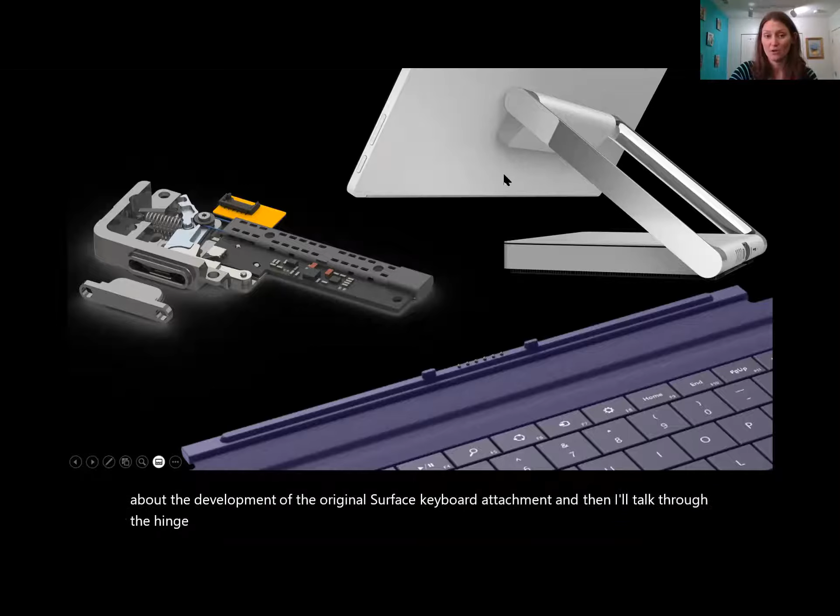And so now I can dive into some of the design examples that I'm sure plenty of you are hungry for. I am going to tell you some stories from 3 different products I helped create. First, I'll talk about the development of the original Surface keyboard attachment, then I'll talk through the hinge design on the Surface Studio, and I'll end with what we call the Detach Module on the first Surface Book.

In my engineering classes throughout college, I was given a ton of problems to solve. Usually these problems had a general definition, a lot of constraints, and an unanswered value that I was seeking. My goal was to find that answer and show the work that got me there. I assumed product making would be similar. You want to make a computer. It should weigh this much. It should be this thick. It should have this much battery life. Now I'll go design the answer. But I quickly learned that was not even close to the case when you're trying to design something that's new and innovative and not out there.

There's no recipe. There's barely even set constraints most of the time. And there definitely isn't a correct answer that you're seeking, and not just one path to get to the end. One of my favorite quotes that I relate closely to product making is this: "If I had asked people what they wanted, they would have said faster horses," attributed to Henry Ford.

So before you jump to conclusions on the quote, I don't see this as consumers are dumb. I don't even see it that consumers don't have great ideas, because they do. But for me, it's more about not closing yourself off to just improving what already exists. It's more about opening yourself up to any and all possibilities and seeing where they take you.

Since the beginning of Surface, we've always started each project with one thing that is going to make that product special and different from anything else in the market. Usually, that one thing has a word that we think of as a main principle or guiding light for that product. For the Surface RT and Surface Pro 1 keyboard, that word was magic.

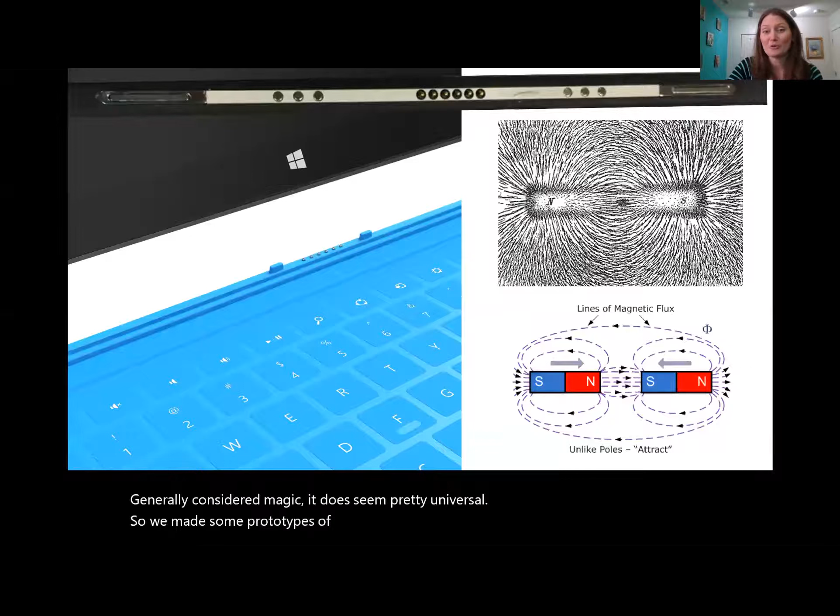So we made some prototypes of magnets. We learned about the general principles of magnets. We bought some off-the-shelf magnets online. This image at the top of the screen is the very first prototype we ever made, where we put some rectangular bar magnets and some circular dot magnets into both the keyboard and the device. And we tried it out, let's get started and see what happens.

Now, we used single pole magnets, which means, as you see here, each magnet has a north and a south. And you can see that the flux is essentially wasted in our application because it's such a large area as it travels from north to south. And we just want it to be in the area that attaches these two devices. So it gets a little bit out of hand. So we needed to research, how were we going to be more intentional about this?

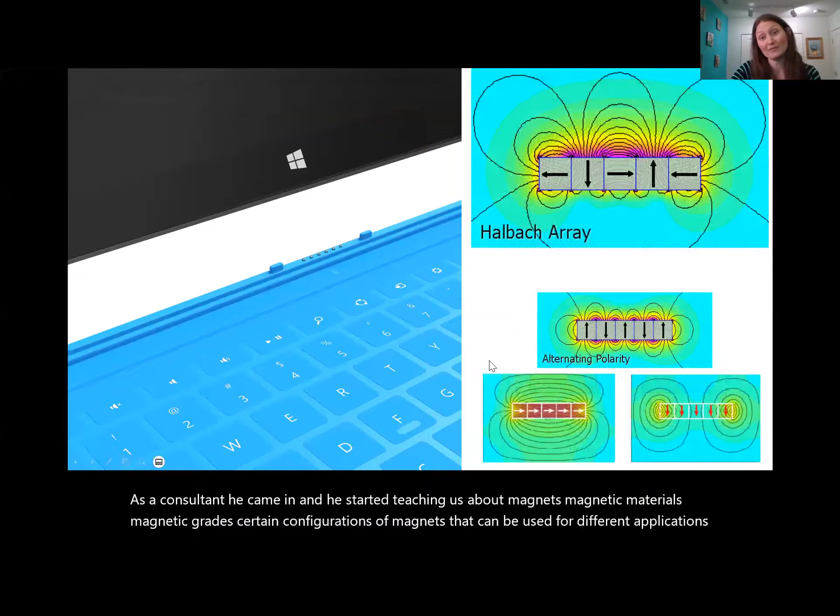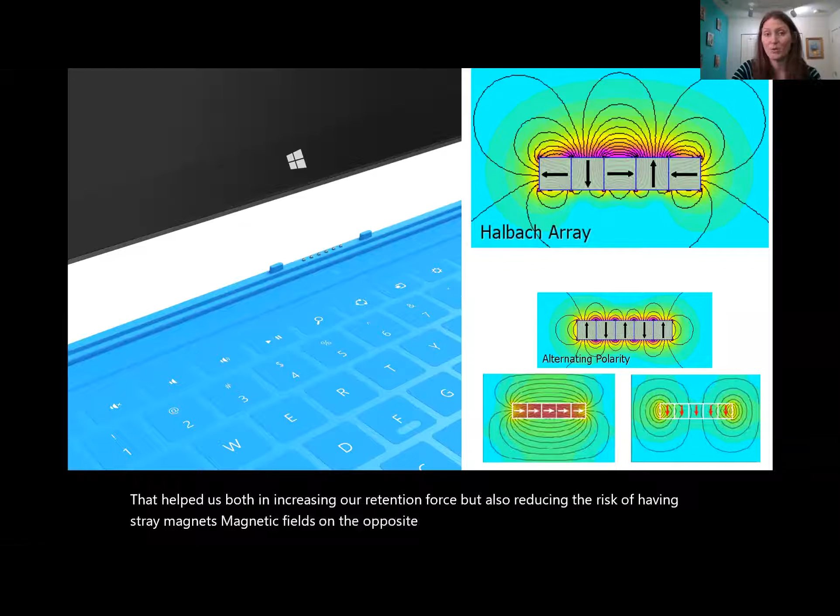So as you see, the fields don't actually have to travel as far to get from the north of one pole to the south of the next pole. And that essentially allows them to double the flux on one side of the magnet while reducing the field to almost nothing on the opposite side. That helped us both in increasing our retention force, but also reducing the risk of having stray magnetic fields on the opposite side of the keyboard, where it could attach to jewelry or metal fibers, or even worse, erase your hotel key or credit card magnetic strips.

The other added benefit to this array is that we could put this series in both the device and the keyboard, and it made clamping great, but it also really helped with alignment. Because similar poles repel each other, this array wants to line up perfectly with its opposite match. So it was really good for our alignment.

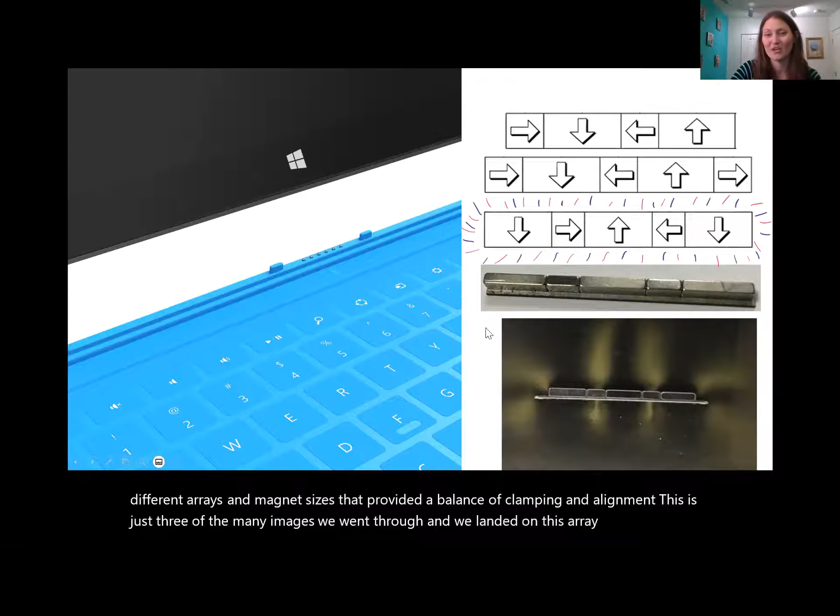We did a combination of magnet simulations mixed with prototypes to iterate through different arrays and magnet sizes that provided a balance of clamping and alignment. This is just 3 of the many images we went through. And we landed on this array here, we called it the 3C2A array, standing for 3 clamping, 2 alignment. These vertical ones served the purpose of clamping, and the horizontal ones served the purpose of alignment.

We might have thought at that point that we were done, since we had gotten really good retention. It's so much better than how it started. We got really good alignment. The pogo pins that you see here were always consistently aligning every time we were attaching this device.

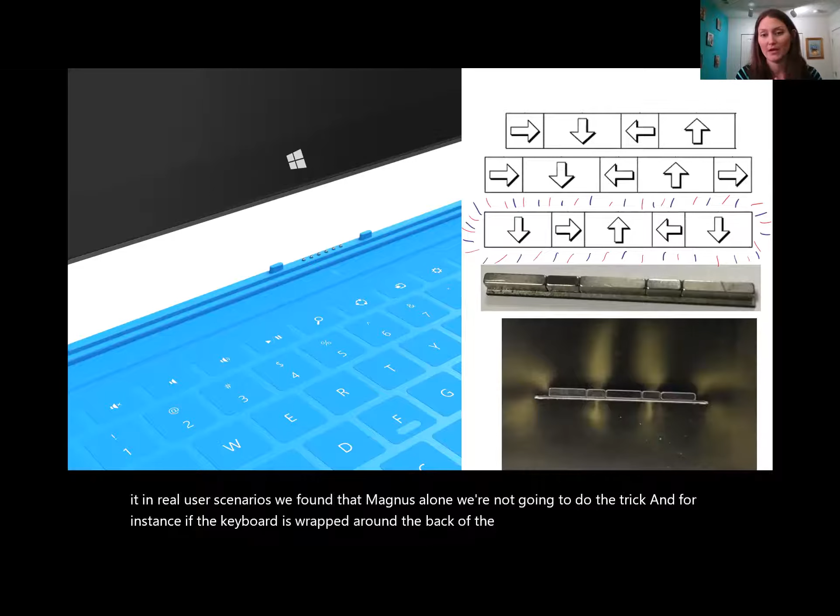But when we started really experiencing this prototype with the device and we started putting it in real user scenarios, we found that magnets alone were not going to do the trick. For instance, if the keyboard is wrapped around the back of the device, the leverage was too much to overcome. The magnets would give and the keyboard would just fall off the device.

So we had a lot of brainstorming sessions with a lot of engineers across the whole group, and made a whole lot more prototypes that didn't fix it. And we finally came up with the idea of fangs to serve as mechanical retention during the rotation. These features, circled on the left, mechanically bind and keep the keyboard spine from wanting to rotate, forcing only the fabric to fold backwards.

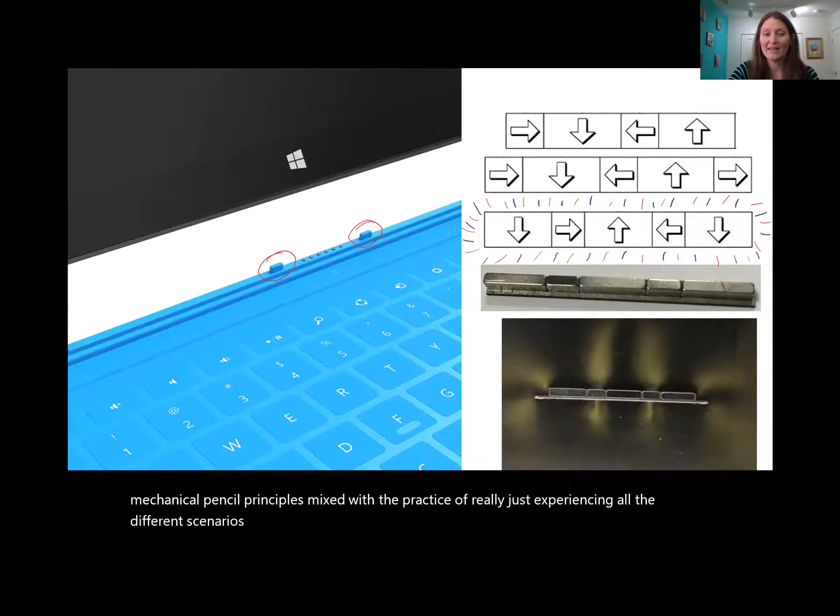So the combination of these mechanical principles mixed with the practice of really just experiencing all the different scenarios for ourselves enabled a design and a product that we really believed was magic, but also functional. It's also worth mentioning that we got 11 different patents on just this portion of the device alone, and how we were able to create this experience in a unique way. So that was pretty cool.

Okay, moving on to a very different aspect of mechanical engineering. I want to tell you about the Surface Studio hinge. For those of you not familiar with the product, it's considered an all-in-one that contains the computing device in this lower region and a 28-inch touch and pen display in the upper section. Let me play that. Good, played.

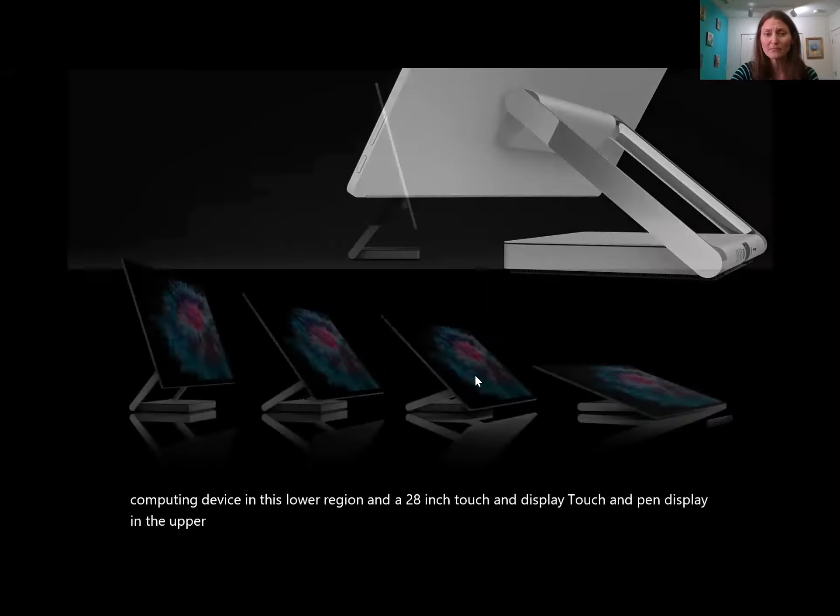The hinge is designed so that the user can use it as their monitor when it's up in its vertical position. They can also transition it down to a drafting table if they want to use it for sketching, and then put it right back up again to be a monitor to be productive again. The hinge was our one thing for this product that had to set it apart from anything else in the market. To do this, we used our one word, and in this case, it was effortless.

I remember the design director suggesting that this needed to be such an easy, effortless transition that his 5-year-old could come and lift this heavy monitor without a problem. He even threatened to bring her in the office a few times when our prototypes weren't quite good enough.

Now, this design direction seemed really ambiguous. So we couldn't start with torque curves and force settings like you might in a typical problem. We had to go back to the basics. We had to start to work through the math and free body diagrams of what might happen in different user scenarios. I probably made some mistakes in this, so don't judge it too much.

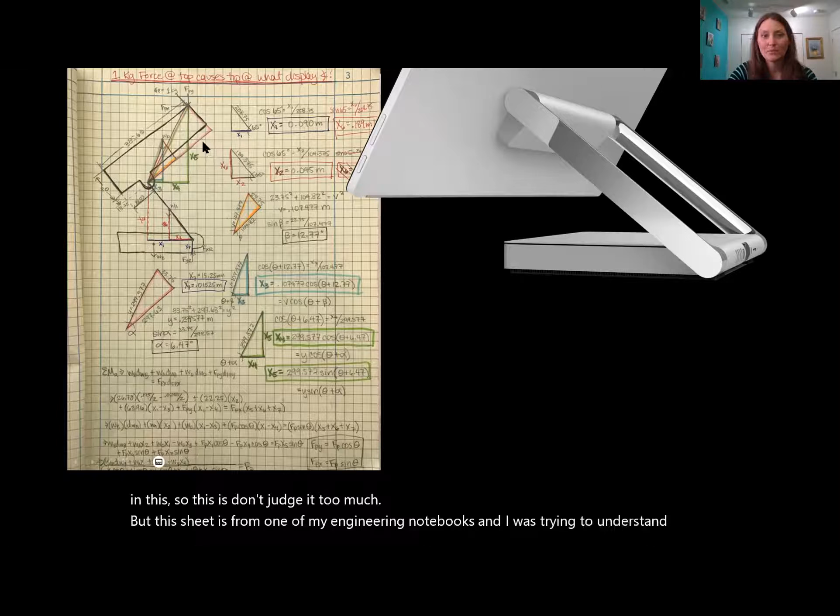But this sheet is from one of my engineering notebooks, and I was trying to understand what display angle would cause the device to tip over if a user applied 1 kilogram of force at the top, mimicking them closing a window or maybe even sketching at the top of the device.

Now, just to get that 1 kilogram force number to start these equations, we had to design some faked prototypes and put them through user testing with pressure sensors and force gauges attached to them, so that we could understand what a user might actually do. We had to find ways to live these experiences just to bring constraints to the mechanical engineering problem and be able to do the math to figure out what we needed to do.

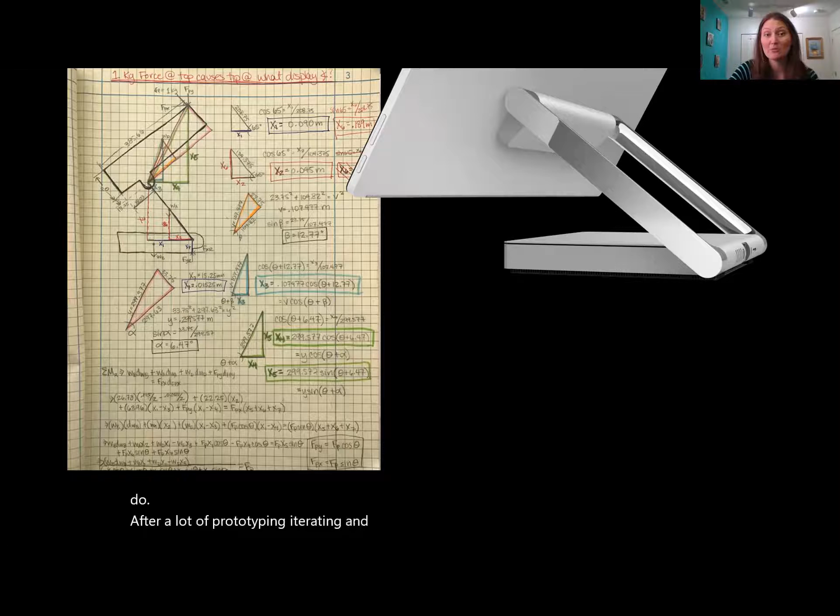After a lot of prototyping, iterating, and even switching product teams midway through, the design finally came to an end. So I'll give you a little insight into where we landed, and a quick little walkthrough of the mechanism. So this here on the left is the display joint.

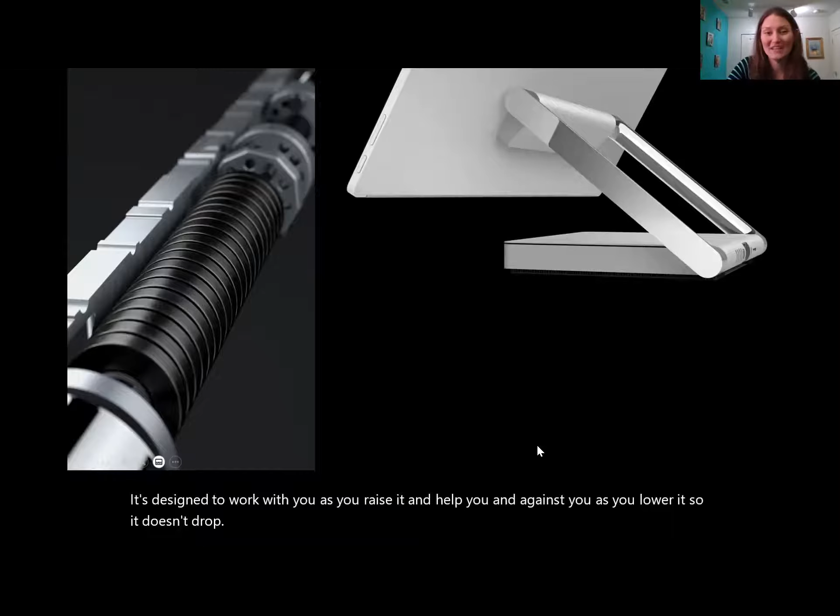This is our beautiful marketing rendering, so it doesn't have all the mechanical drawings that you might expect, but what you're seeing right now is a pretty intense one-directional counterbalance torsion spring designed to counteract the weight of the heavy display. It's designed to work with you as you raise it, and against you as you lower it so it doesn't drop. These shiny arms, in addition to routing the cable and looking beautiful, house a 4-bar linkage design made from belts, gears, and other mechanical couplings.

And it defines the relationship between the arm angle and the display angle without allowing free play or bounce. That limits the device to 1 degree of freedom, but it still enables optimized angles in desktop mode, studio mode, and everything in between. The base hinge is a compression spring-loaded cam mechanism that works with the display springs and linkage system to keep the system balanced and smooth throughout its full range of motion.

After assembly in the factory, these design features are tuned with 11 unique processes that each and every system must go through before it gets boxed up to ensure that it has the perfect transition. This extreme tuning is not typical of other Surface devices we ship, but the problem was unique and difficult enough that we had to put the right processes in place to get that premium experience we wanted every customer to have.

Although we were not able to start the product with a known user torque profile, one important aspect of product making is documenting the process at the end. This is partially for future development, for when we make the next one, but it's also to ensure that we have consistency in the product over time.

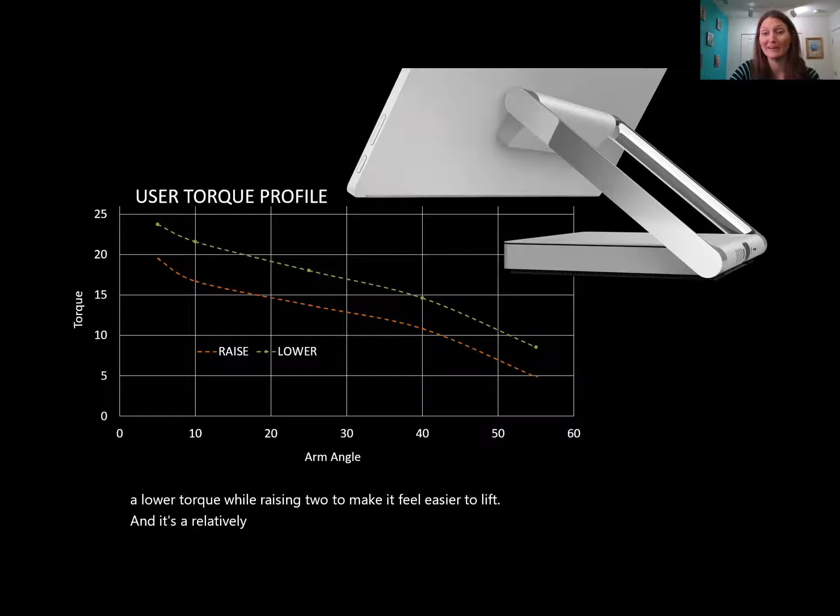As you can see, the final design resulted in an asymmetrical torque curve that had higher torque while lowering to make sure it wouldn't fall down, and a lower torque while raising to make it feel easier to lift. And that's a relatively common method for fighting gravity, but probably why marketing named this the zero gravity hinge, and ultimately got us a device that the team was proud to say could actually be transitioned by a 5-year-old.

The last example I'd like to walk you through is unique compared to the other two, in that it was not just mechanical engineering that had to discover and design around an experience. This is what we call the Detach Module for the Surface Book. The Surface Book is one of the higher end mobile devices that Surface makes, and it has a challenge of integrating both a CPU for compute processing and an NVIDIA GPU for graphics processing.

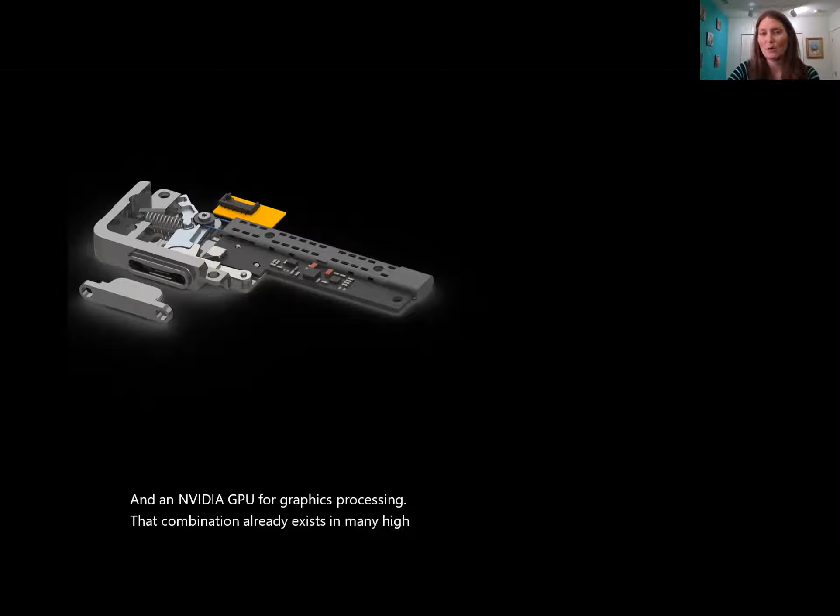That combination already exists in many high-end PCs on the market, but we needed one thing that was going to make ours unique. Because Surface has always been pen and touch centric, we decided we wanted this device to be something that artists and creators could use in their everyday work, but also enable mobility. Imagine a photographer who travels to LA for a photo shoot, needs to be able to real-time process their images on site, sketch on the screen while discussing with the client, and then go back to their hotel to edit all the photos and send them out that night. This customer was an inspiration for an experience we wanted to enable.

So we made a device that could separate from its base when you needed inking and mobility and reattach when you needed performance. Here's a video showing that removal experience, what we refer to as detach. The top tablet portion has a CPU, batteries, all the typical guts of a touch and pen enabled tablet, so it can be fully used on its own. Then when you attach it to the base, you add even more battery life and the power to run 3D CAD design, photo and video editing, or even start gaming.

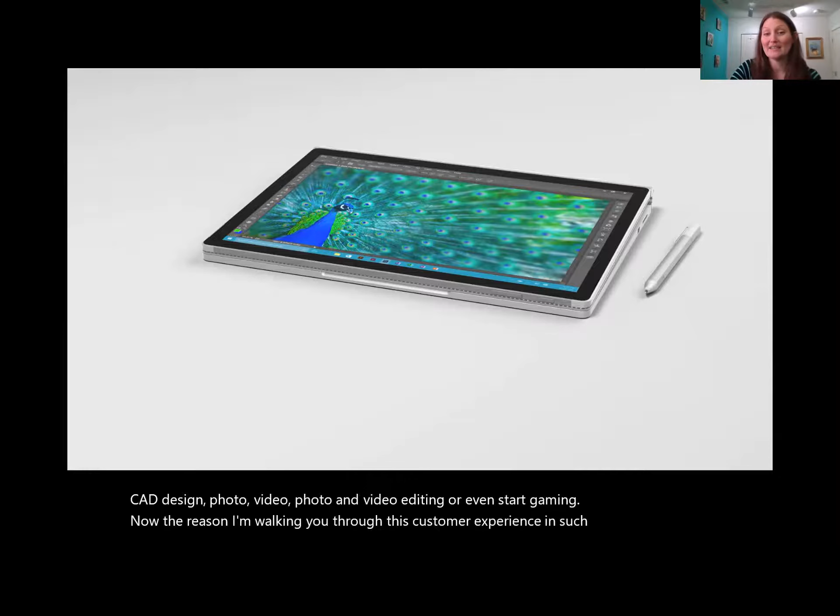Now, the reason I'm walking you through this customer experience in such detail is not purely for Microsoft marketing. I really think it helps draw the picture around the one word that helped us define how we wanted this design to work: seamless. The device needed to be able to transform in a seamless way, enabling max productivity. You want to watch a movie, sketch a quick design, or show some images to a client, take the tablet off. You need to get back to being productive, attach it to the base.

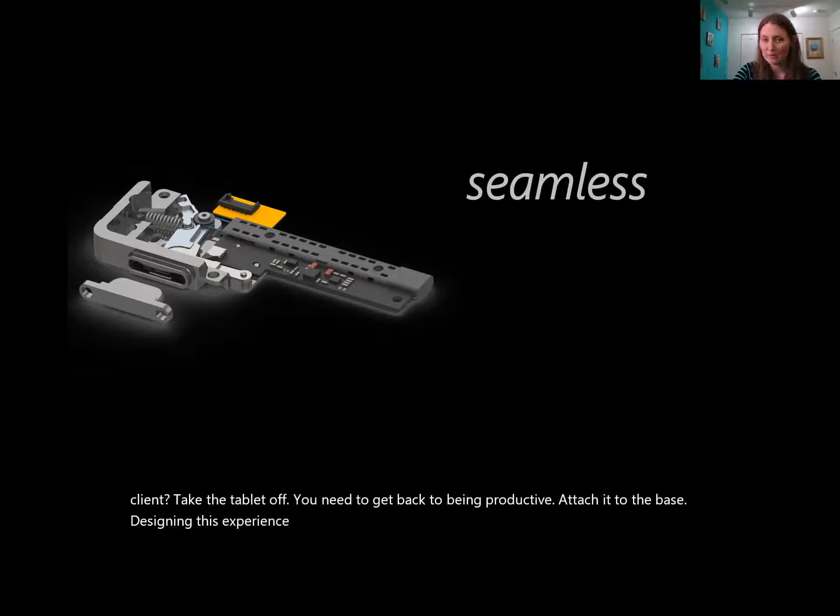Designing this experience seems like a mechanical problem at first, until we realized that separating your GPU from your CPU while the GPU was being used could cause weird failures, including data loss. Not something we were willing to risk. So we quickly agreed that this needed to be an active latch or lock that asked the computer permission before releasing. Basically, we needed an actuator. And so our research began.

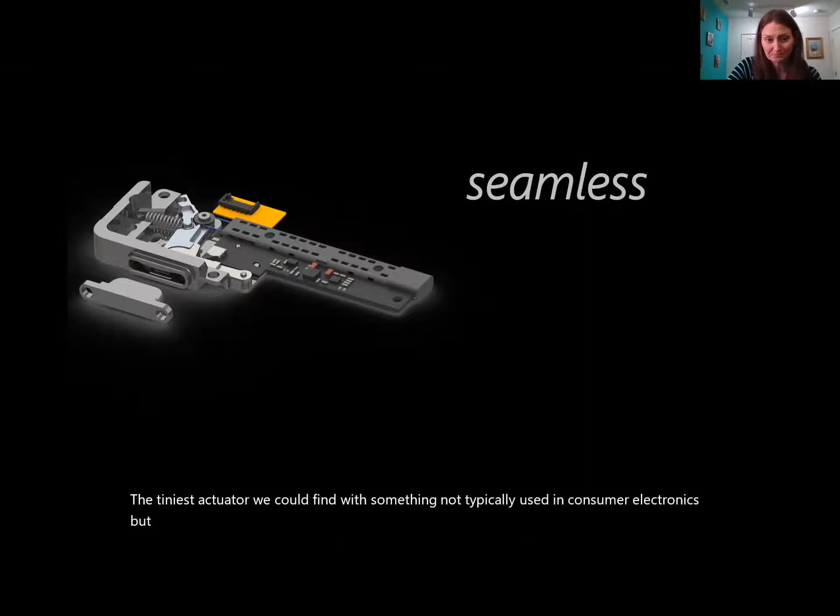Motors are the most typical actuators used in electronic devices, but we had to fit this in a really thin tablet. The tiniest actuator we could find was something not typically used in consumer electronics, but it seemed possible. We made a prototype using a shape memory alloy called nitinol, named for its ingredients nickel and titanium, and it worked great. We could apply a known current to it and tightly control its contraction, stop the current, and it would slowly expand back to its original shape.

With the right mechanism behind it, we would be able to use this actively to release a lock and enable the top to separate from the base.

Now I'll keep this video playing on loop since there's a lot to see. I think it should just keep playing. If it doesn't, I'll replay. I'll talk through how it works as you're watching it.

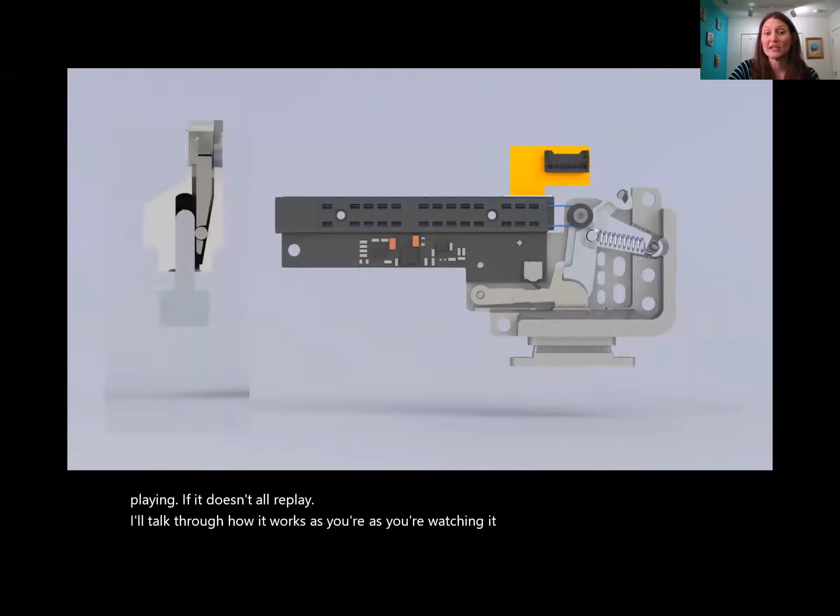So the picture on the right is looking at the mechanism that is housed inside the computer, except for this fang. This is part of the base that comes in and out of it. But the rest of this is housed inside the actual tablet part of the computer. The image on the left is a cross section, imagine right up through the middle essentially, so you can see how it's working, what's going on the inside of the module.

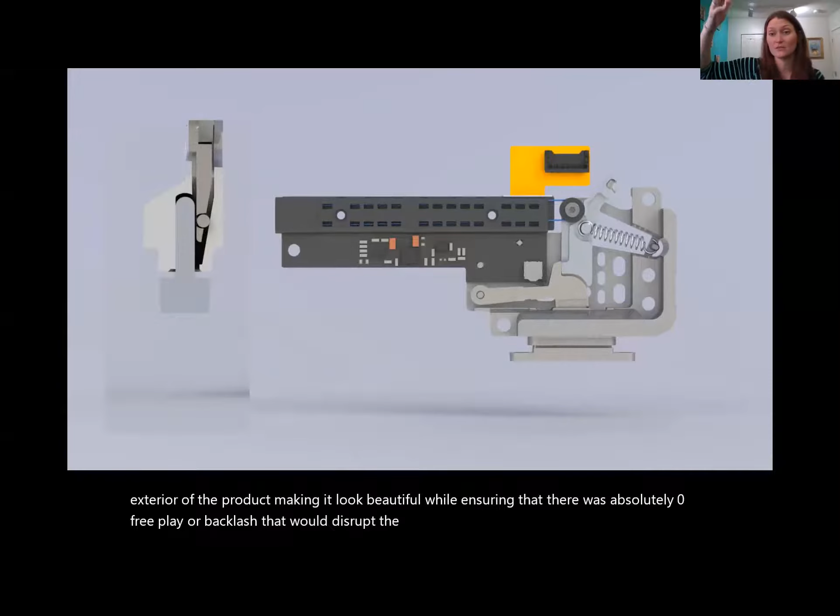Our main constraints here involved doing our best to minimize the visual disruption to the exterior of the product, making it look beautiful, while ensuring that there was absolutely zero free play or backlash that would disrupt the connector that carried all the signals between the CPU and the GPU, the top and the bottom. We needed something that could be attached easily anytime by the customer, but needed to ask permission from the computer to release. These constraints forced us to do a ton of exploring and bridging from experiences in our life as a customer, and then bring them into design possibilities and try them out.

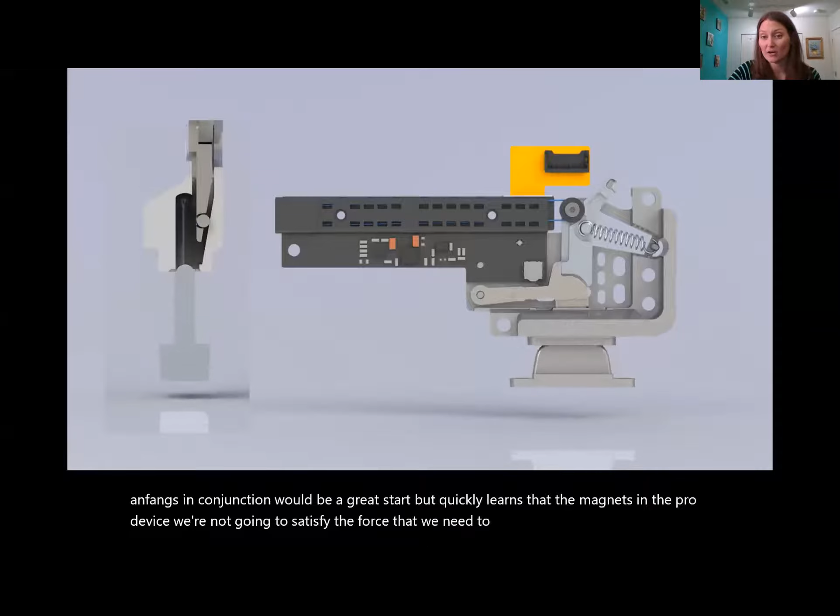Part of our inspiration, as you can tell by the fang, came from the first thing I talked about today, the Surface Pro device and keyboard connection. We thought that magnets and fangs in conjunction would be a great start, but quickly learned that the magnets in the Pro device were not going to satisfy the force that we need to lock it in place, since this is much heavier, or the alignment tolerances that we need. The pogo pins that we had in that had a lot more free play and freedom. The 80 pin connector that we used to have the CPU and GPU talk to each other needed extreme precision. So we basically needed to rely a lot more on the fangs in this product than we did the magnets, which is opposite of how we did on the Pro.

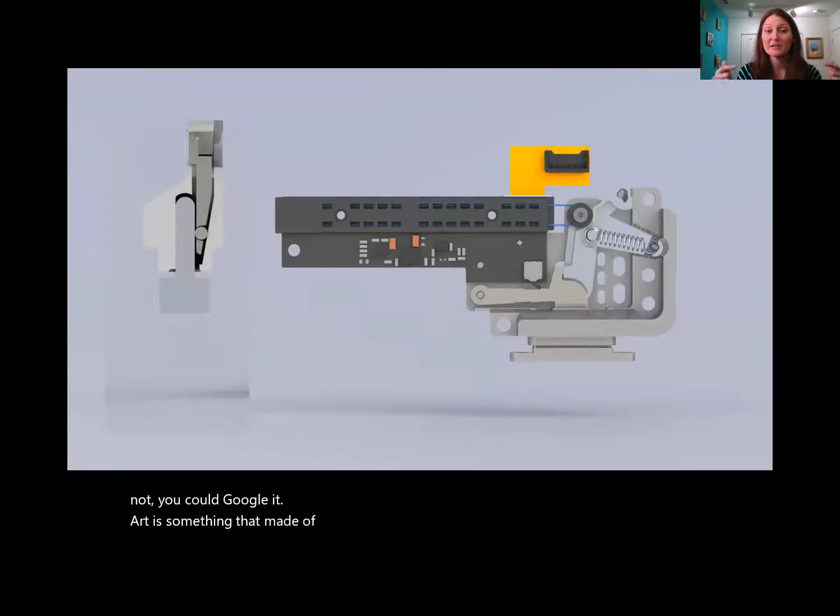So enter, after that, our second design inspiration, the Chinese finger trap. I hope many of you are familiar with that. If not, you could Google it. It's something typically made of bamboo. You can easily place your fingers inside anytime you like, but when you try to remove them, you're essentially creating a friction lock with your fingers. The harder you pull, the tighter it gets.

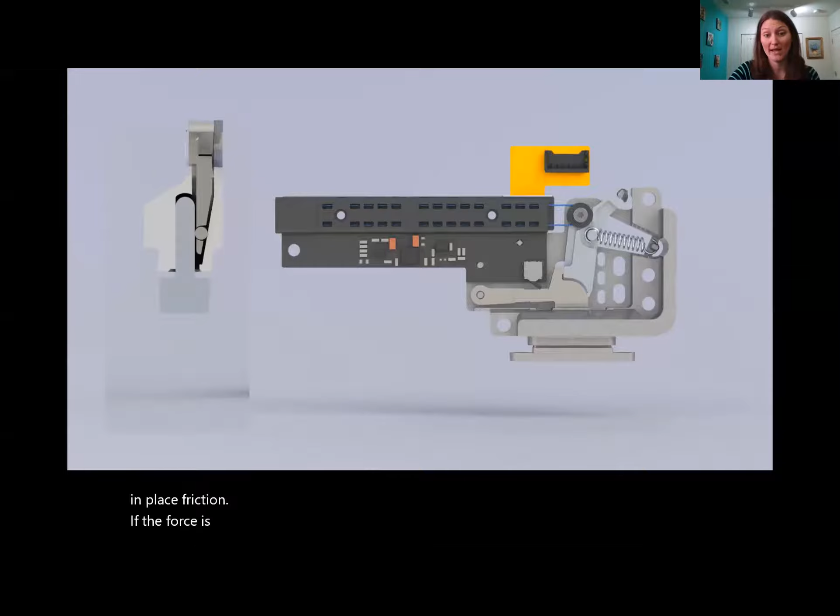In the design here, you see, we have a roller that is trapped between two surfaces, but it's able to roll freely if pushed or pulled. Now, as the fang gets inserted into the detach mechanism, it pushes the roller up and locks it in place with friction. If force is applied in an attempt to pull the fang away from the base, it gets tighter and locks into place, essentially making it stuck.

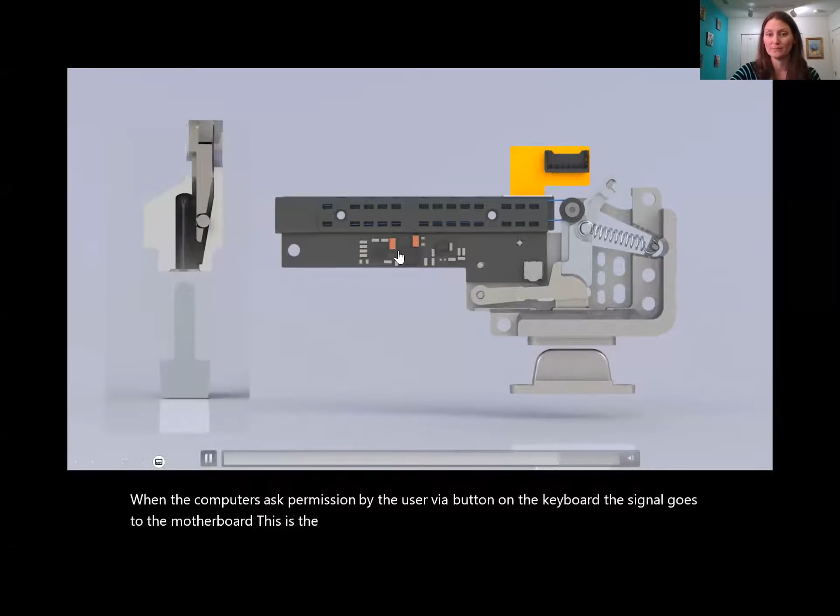The only way it can be released is for the roller to be pulled up vertically and out of the way. This is where the nitinol, also known as muscle wire, comes into play. And that's the blue wire that you see up here. The muscle wire is attached to a lever arm that can pull the roller up and out of its locked position. When the computer's asked permission by the user via a button on the keyboard, the signal goes to the motherboard. This is the Detach Module board, but the signal would go through this FPC to the motherboard. Send it a signal, ask it permission, and if it said yes, go ahead, you're not using your GPU, it sends the current here, contracts the muscle wire, pulls the lever out of the way, unlocks it.

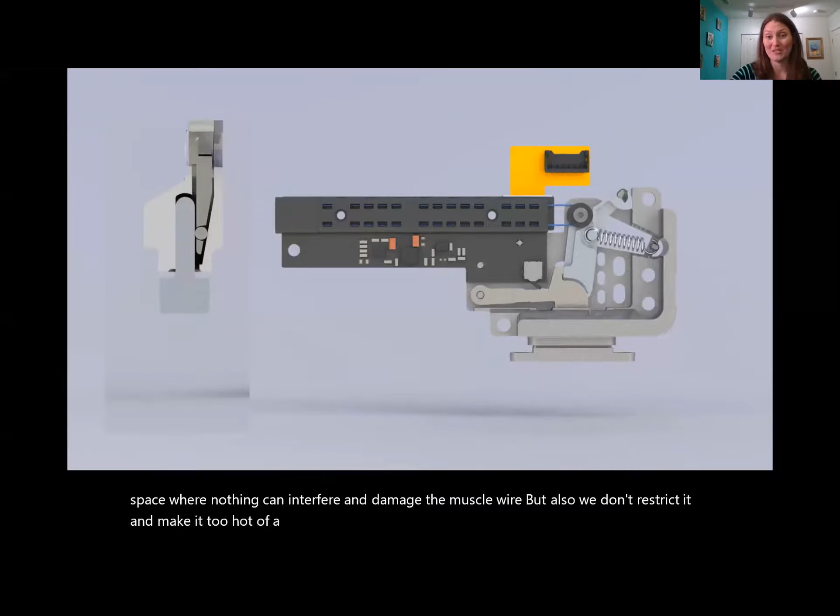Now there was a whole lot of time spent on how much current, how long do we send the current, how long does it take to cool down? How can we try to enable a space where nothing can interfere and damage the muscle wire, but also we don't restrict it and make it too hot of a little thermal area where it can retain heat? So there's definitely a lot of work beyond the mechanism you see here to make this work, but it was still a pretty intense and pretty fun problem to work through with the EE team designing these boards and the software team designing how that interaction is going to happen from customer to the actual mechanism.

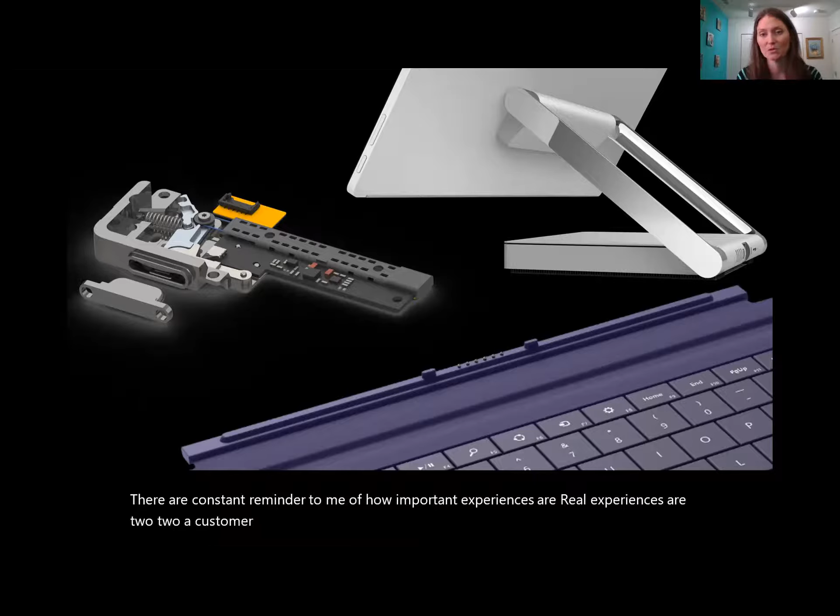Now, all of these designs took an incredible amount of concept work, prototyping, iterating, testing, troubleshooting, you name it. They're a constant reminder to me of how important experiences are, real experiences are to a customer, especially nowadays when we're so closely tied to our devices. I feel proud to have a job where I can bring new ideas into the world and get to be both the designer of it and a consumer of my own work. And I think it really helps me feel connected to what I do.

And it makes me appreciate the challenges I see everywhere in all different kinds of designs. It's opened my eyes to seeing a whole lot of stuff in the world, which I had never really noticed before. Now, when I'm asked advice from engineers interested in getting into this field, I encourage them to do one thing, and that is design. Find problems in your life and design a fix for it.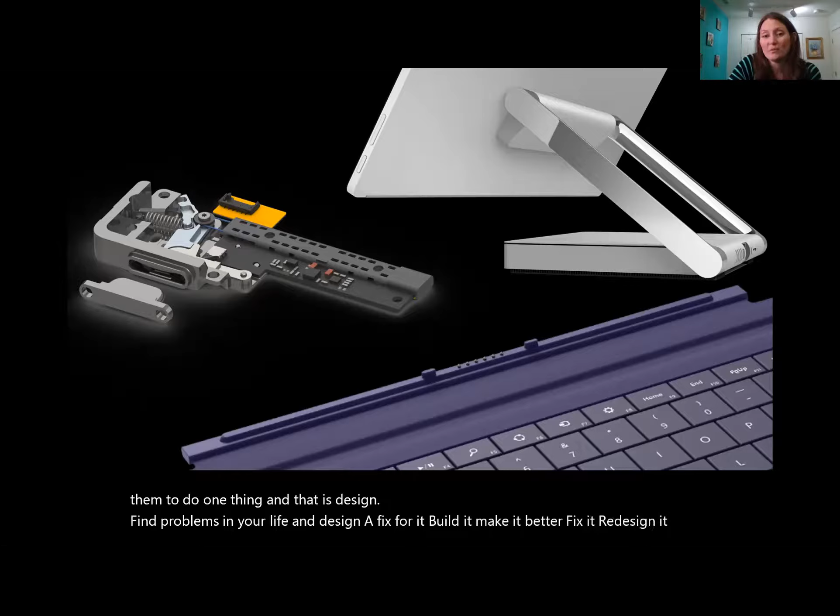Build it, make it better, fix it, redesign it again, and then move to another problem and do the same thing. I think that's where you really start to exercise that part of your brain and really start to explore and find that true innovation and that true passion.

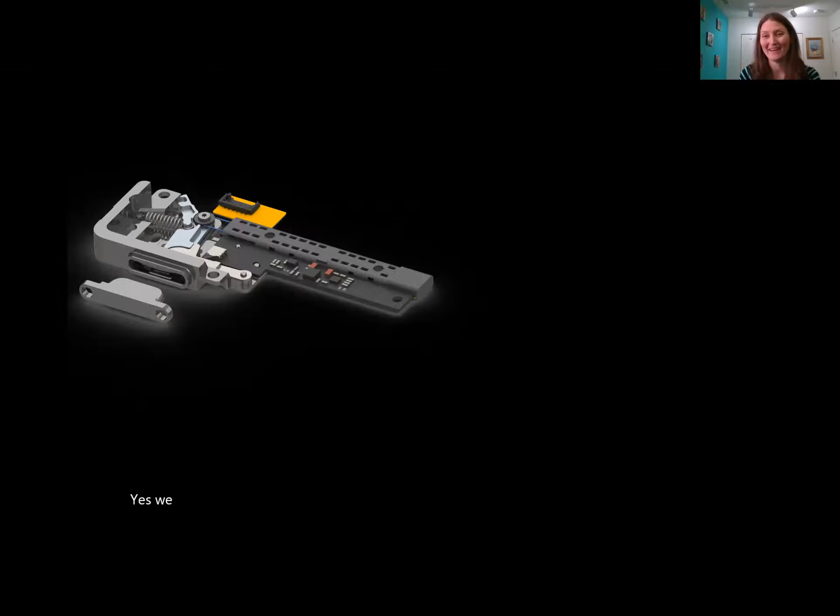There was a lot of work that went into how do we get the current to heat it up? How do we heat it up quickly? How long do we keep the heat there? How can we maintain the heat in that contained area? The best answer I can give you is that it was a big challenge and we had to go through a lot of iterations, a lot of piece part design. We always have builds where we're building the whole product and the software teams, the electrical teams, the mechanical teams are all involved.

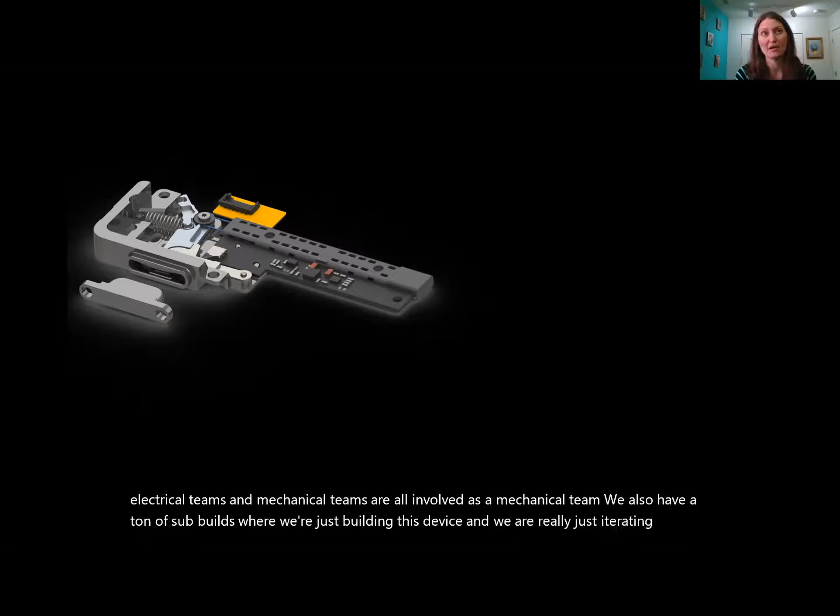As a mechanical team, we also have a ton of sub builds where we're just building this device. And we are really just iterating through the process and figuring out, okay, when we send current, how long does it take? You know, we're sitting there with timers. How long does it take before it actually pulls up? Okay, we stop the current. How long does it take before it falls back down again? We went through that whole series of iterations and tests as we were developing this to learn that and to overcome that challenge.

I think if you ask some of the engineers that designed it, they might say it doesn't respond as fast as we want it to. But it was definitely an optimized process, as good as we could get it with our size constraints that we had. Great, thank you so much.

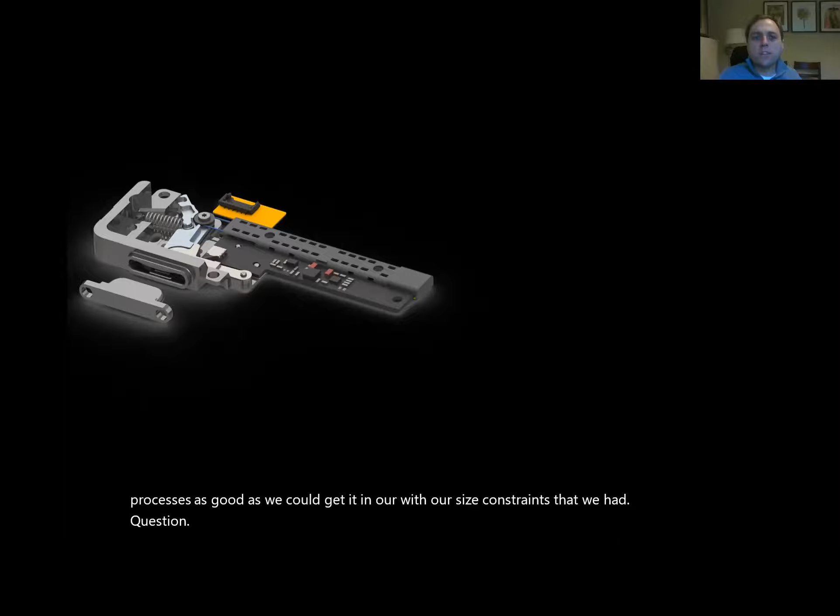We've got another question that was asked in the Q&A. I'll ask it for the questioner. How were you able to get the strength requirement of a normal actuator from the nitinol wire?

So there was, again, prototype and iterating and equations and formulas and all that type of work. And I will start with being honest and saying, this was a long time ago. And I have actually had 2.5 babies since then. So my brain has been scrambled a few times, but I know that there was a lot of work there.

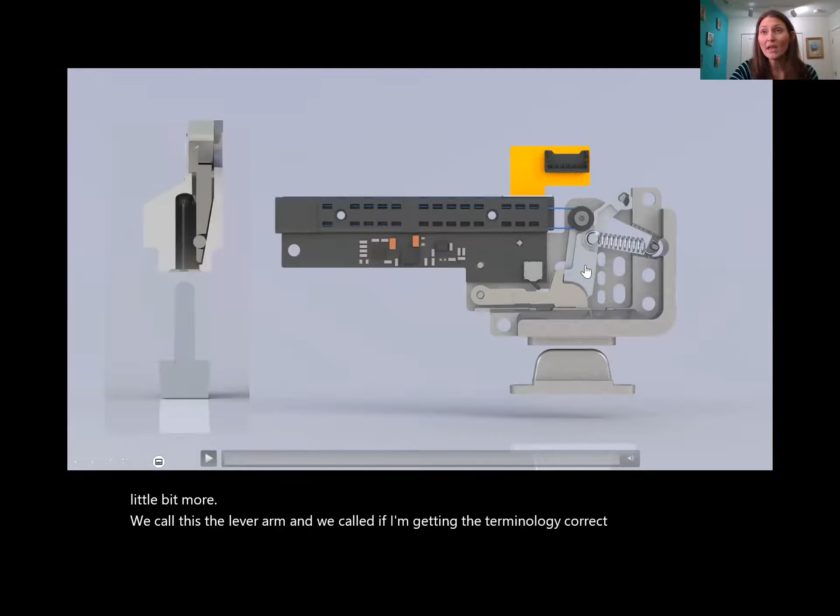We called this the lever arm. Let me go to the video. Maybe that helps a little bit more. We call this the lever arm, and we called, if I'm getting the terminology correct, we called this the rocker arm. And then we had it spring loaded, and we had to really define what is the length of the muscle wire going to be? What is the spring force going to be here? How are we going to use mechanical advantage to really be able to pull that lever out of place?

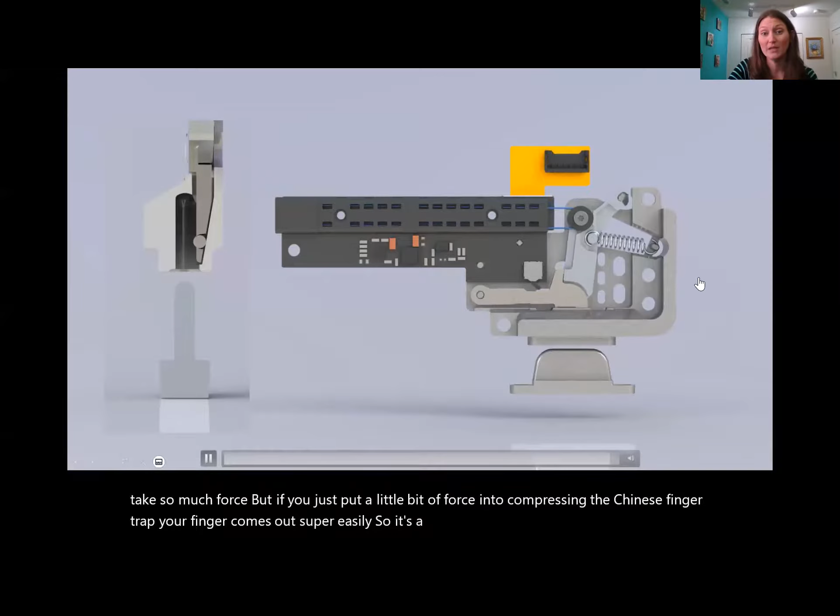And with the way that this concept of friction lock works, it actually isn't as hard as you would think it was. Like the idea of the Chinese finger trap, it feels like it's going to be impossible as you're pulling it apart, and oh my gosh, it's going to take so much force. But if you just put a little bit of force into compressing the Chinese finger trap, your finger comes out super easily. So it is a hard math and physics problem that involved a whole lot of pre-work, so that we weren't just senselessly making prototypes.

But even when we do the pre-work and we say, okay, this is how much force and this is going to pull it up, and you design it, the lever only pulls up the roller halfway and it gets stuck, and we have to go back to the drawing board and redesign it, figure out what we did wrong, reiterate, go through that whole process again, spend all the money it takes to rebuild these things. Like, we definitely had to go through that here.

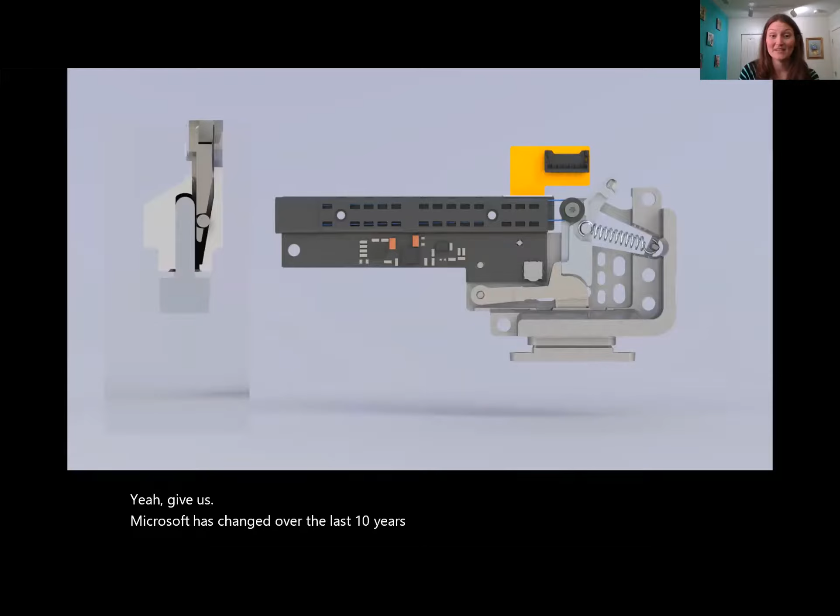I have a question. Can you give us a sense of how Microsoft has changed over the last 10 years since you've been there? Yes, it's a good question, and it's been pretty drastic. I kind of see two different realms, Surface and then Microsoft in general. In the Surface realm, when we were working on Surface Pro 1, we were like a startup. We were just trying to figure ourselves out, just trying to make something.

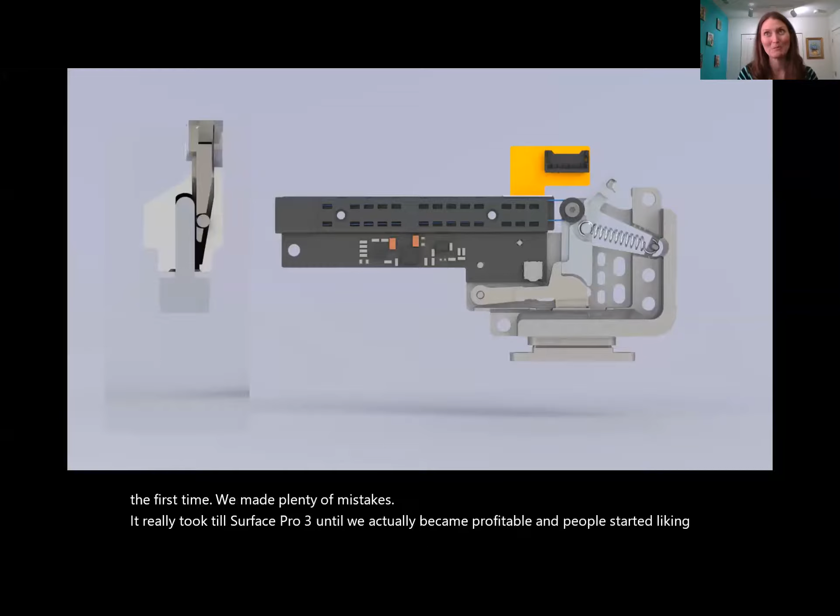We all came from different backgrounds, and we were learning how to work together as a team. We didn't have any real processes in place. We were figuring it all out for the first time. We made plenty of mistakes. It really took till Surface Pro 3 until we actually became profitable, and people started liking us. People outside of Seattle started showing up with Surface Pros.

So there's that aspect of it, that it changed from kind of startup culture into what now is a lot more scalability, a lot more people to help do things, a lot more support. I don't have to travel to China as much as I used to, because I have teams in China. And we couldn't have been able to be a startup during COVID, because that first couple of years, we were just in China all the time, solving problems, learning about stuff, fixing things.

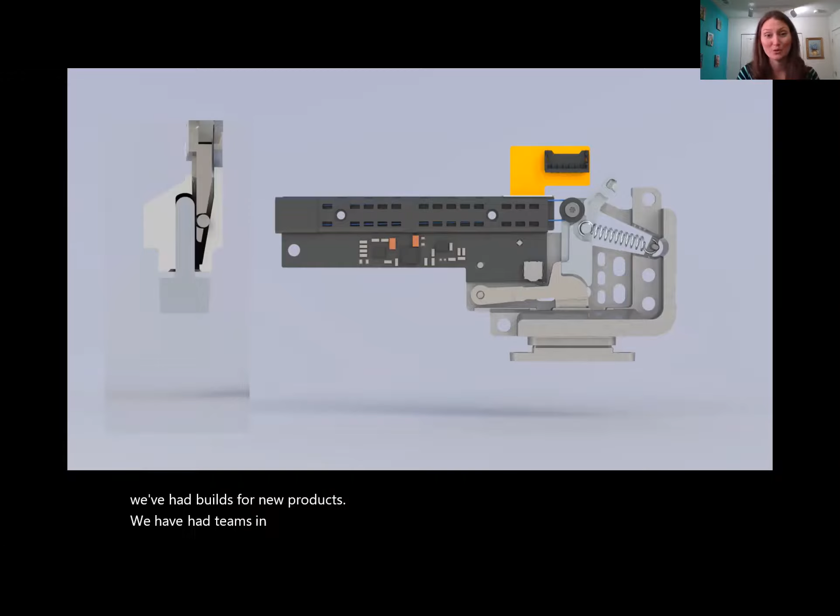This last year, as we've had builds for new products, we have had teams in China, brilliant mechanical engineers in China, that have been solving our problems for us and showing us that maybe we don't actually have to go to China. So the infrastructure and the scaling that's happened is pretty big.

There's another big aspect that's the Microsoft aspect. Satya became CEO. He started a very long time ago. He became CEO about, I think it was maybe 5 or 6 years ago. And the culture has changed drastically since then. It's that kind of thing that you don't even totally realize that it's a problem until later.

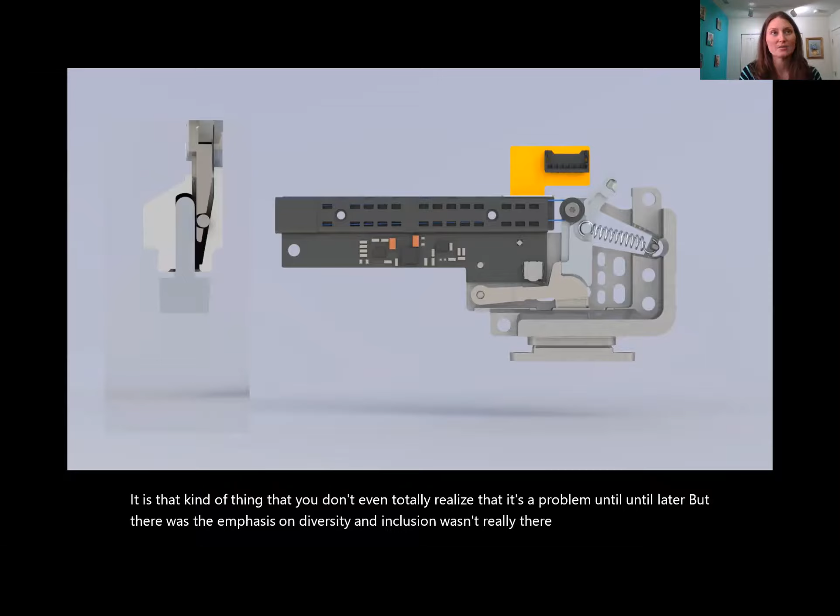But the emphasis on diversity and inclusion wasn't really there, and there was a lot of kind of... trying to think of how to say it. I'll just say that the culture has changed a lot, and now I feel like people want to hear each other, they want to listen to each other, they want outside perspectives and empathy.

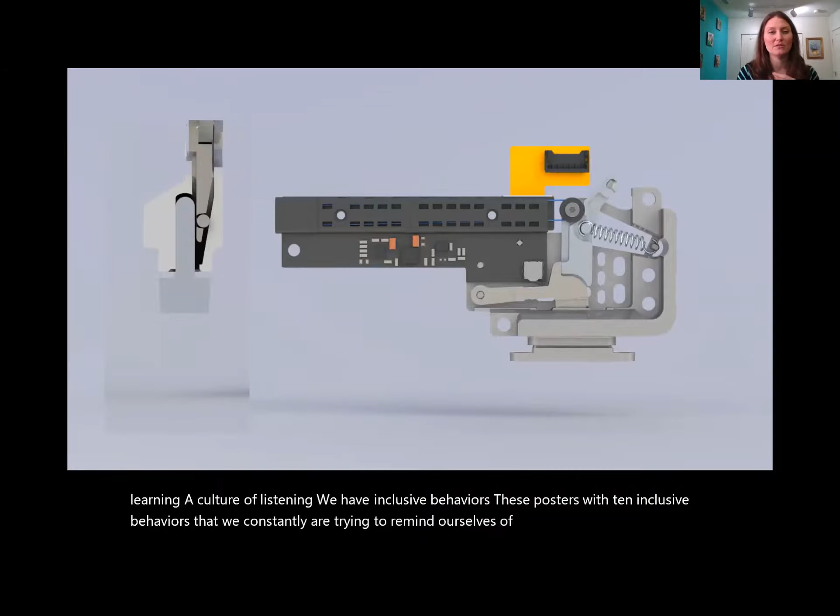We try to be less siloed where we can from a confidentiality standpoint, and we really try to learn from each other and support a culture of learning, a culture of listening. We have inclusive behaviors, these posters with 10 inclusive behaviors that we constantly are trying to remind ourselves of: listening to people, second guessing your strong reactions, understanding and examining your assumptions, and all these things.

That is an emphasis that has made a huge change, and I think enabled us to welcome a much more diverse population. And as any statistic that I fully agree with, the more diverse you are, the more options you have, the more you know how to address some of these consumer problems, the more different ideas, the more different perspectives. So it's been fantastic to see it go from me being the only female to now a team where there's 8 or 9 females.

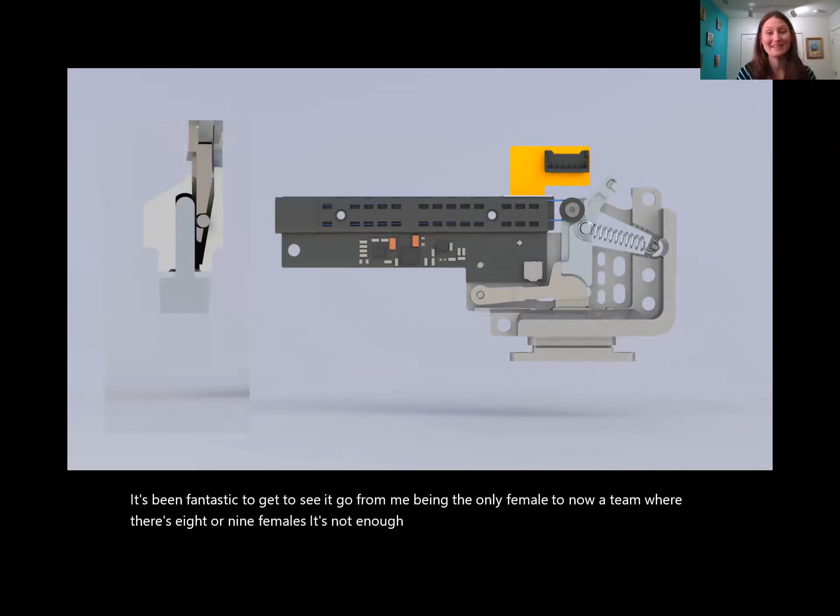It's not enough. We need some more. We need different races. We need different cultures. We need all kinds of different things, but it's made really good progress. And I appreciate that a lot.

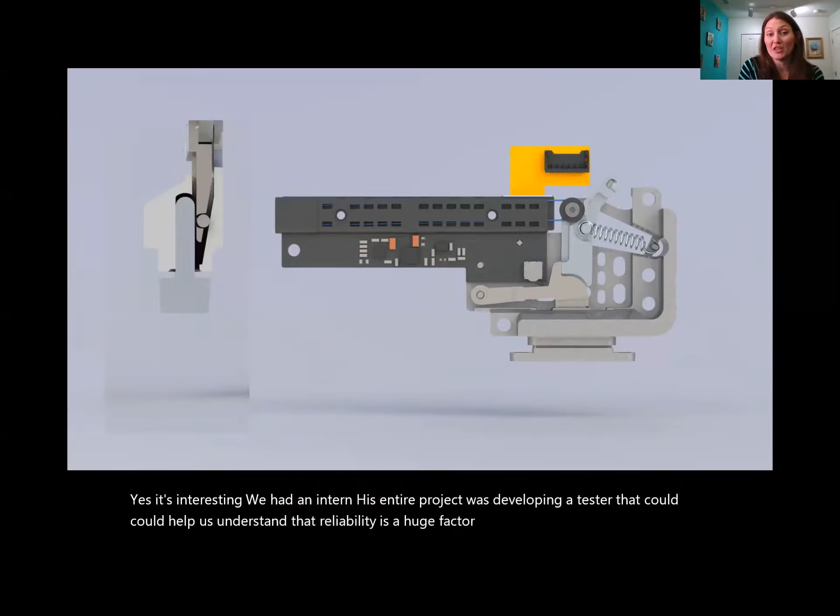Hi. I was curious if you guys looked at the longevity of a nitinol actuator and how you solved that problem. Yeah, actually it's interesting. We had an intern. His entire project was developing a tester that could help us understand that. Reliability is a huge factor in everything we do, in making premium products that are going to last over time. And we typically will lean on the reliability team to help us design testers and make sure that these things are lasting over time.

But we were going through such rapid iteration, and there was so much complexity to just the Surface Book product that one of the engineers on our team had an intern and thought this is a perfect opportunity for him. And it was fantastic. He did a great job. He created a tester that just exercised this over and over again. And of course, we had to design the parameters to make sure that it was cooling down and fully relaxing before starting back up again.

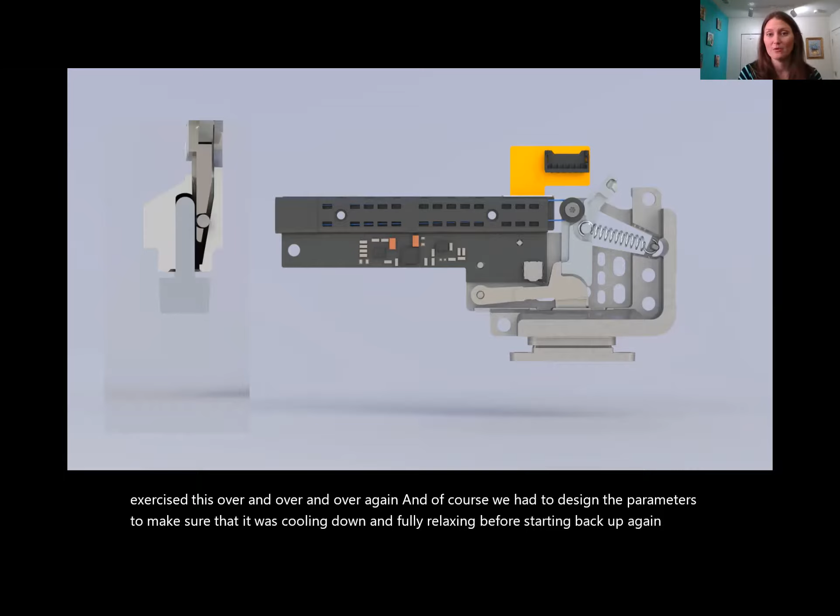And we did run into some reliability problems, and we were able to FA those and find out through that tester what the life of this was going to be, and ensure that with the reliability specs we have, it was going to meet those standards over time. You said FA, I assume it's failure analysis? Yes, sorry. I'm trying not to use acronyms, but it is so hard. No, we all have our speak, Microsoft-ese, if you will. Great. When we say FA, it's failure analysis, and it's really just getting to the root of the problem, figuring out what went wrong.

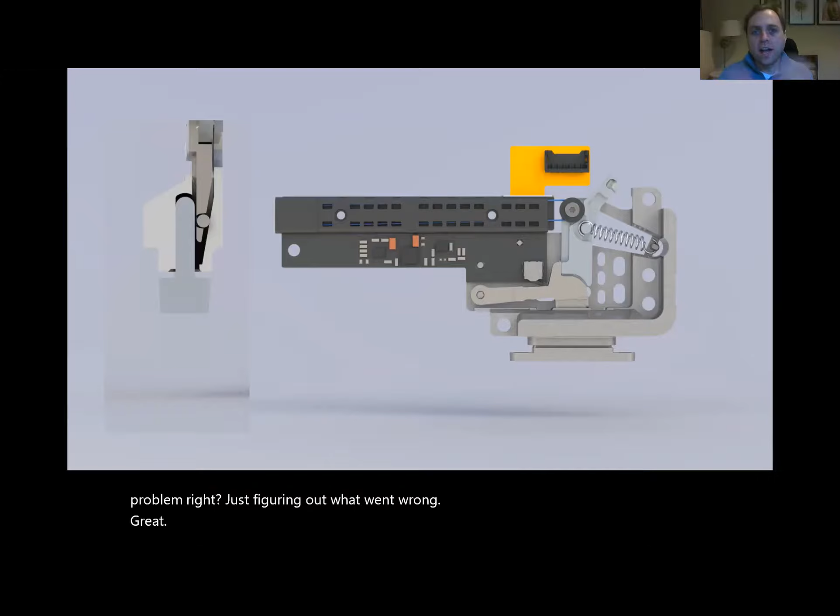Great. There's another question in the Q&A from Melissa Stossel, who's asking, on average, how long does it take from the high-level idea of the seamless keyboard experience to developing the requirements and constraints of what that means as a physical interpretation? So I guess it's soup to nuts type of ideas.

Yeah, it's a good question. It varies depending on the complexity. We have different timelines for different products. Typically a product development from beginning concept to when we're actually shipping it is somewhere between, we'll call it 18 to 24 months, depending on the product. And usually if it is something like 24 months, there's been some pretty big changes that we've had to compensate for and redirect and change.

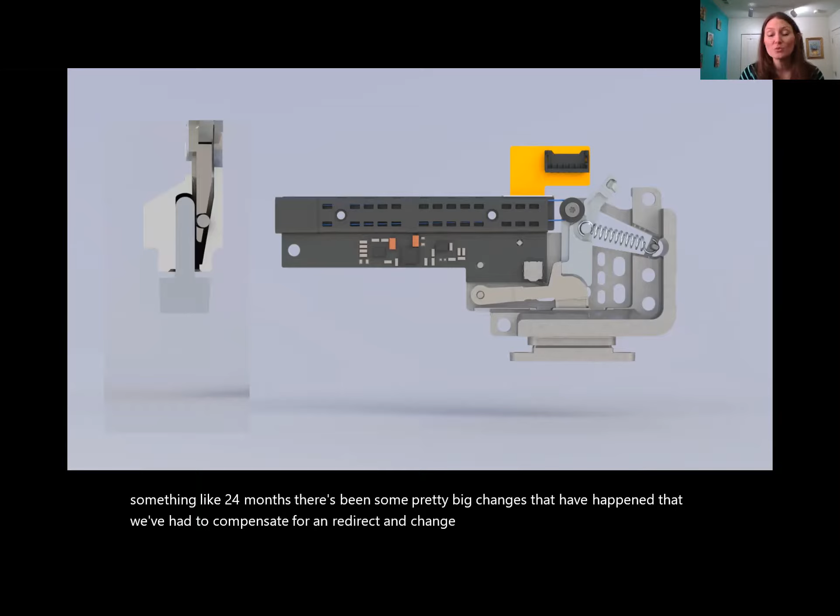But from when someone has an idea to when we have something in our hands, that can be a matter of a day, right? So not something that we would ship by any means, but make it out of cardboard, make it out of string. What we did with this particular mechanism is there was already a nitinol prototype that existed for a different function. And we repurposed that into a form factor that is not a computer, but we pretended like it was for the sake of that. And we put it in there and showed that it could do what we did.

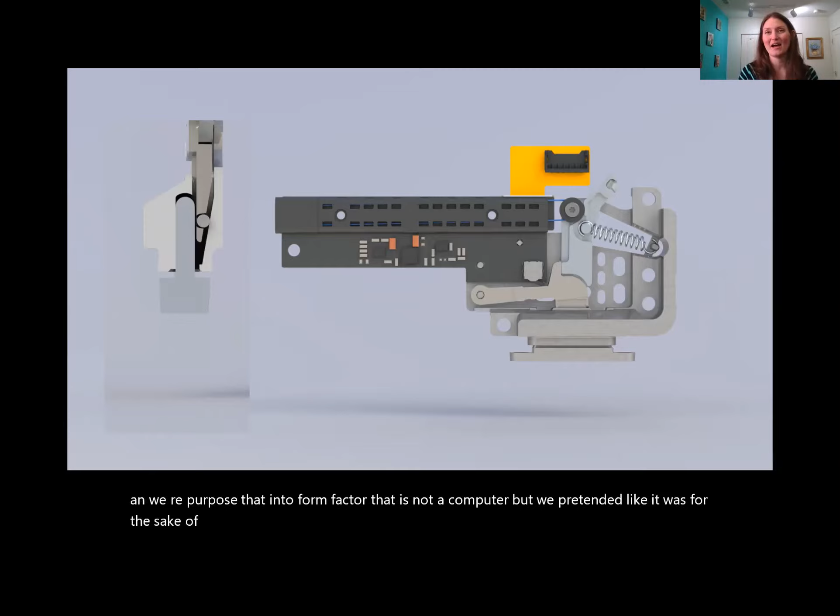We powered it with a big old battery. I tried to find the video of that prototype because I know it exists somewhere. But the idea was basically trying to prove that this concept can be in our field and can be something that we use. And then from then on, it just grows and it changes a lot. Sometimes things will go through 10 or 15 iterations. Sometimes it's 150 iterations. It really depends on the complexity. So I hope, does that answer the question?

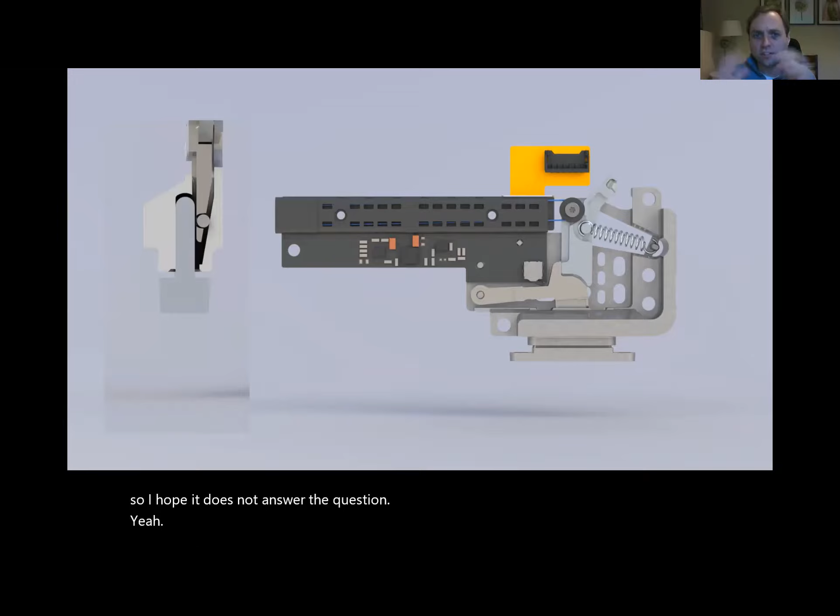Yeah, the next question, I think this is from Santosh, but I'm not too sure. But this is for the Surface Pro Chinese finger trap. How difficult was it to deal with the variations in temperatures that could occur in a tightly packaged electronic, such as the Surface Pro? I mean, especially with the CPU, the GPU, and how would this affect its mechanical properties? Yeah, it definitely has a big impact.

You can design this part at a part level and run part level testing and everything's great, and then you put it in the system and it's failing, or you start running a really intense CAD program or run a Windows update, something that uses a lot of heat, and it doesn't work anymore. And so we had to take system trade-offs and move the CPU to where it wasn't next to these.

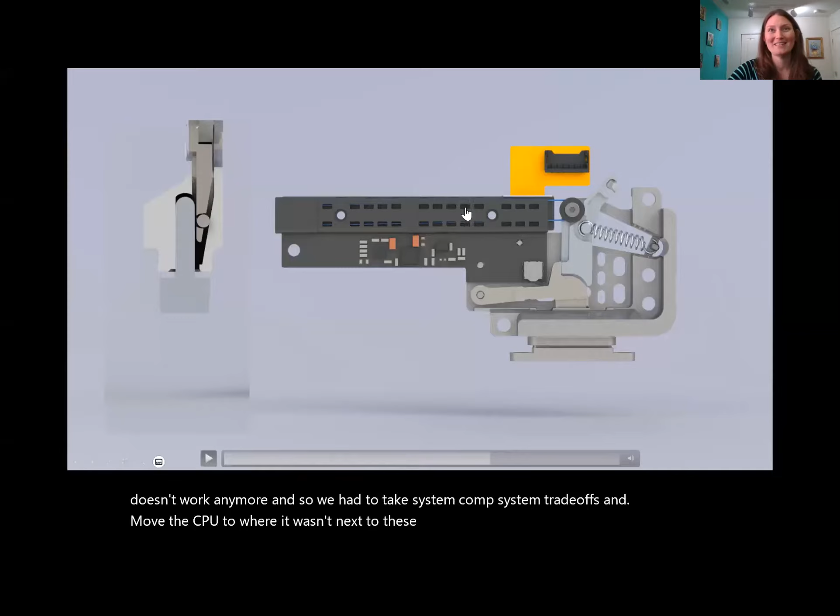We had to design this black part here. We called it the super cover because it had a lot of purposes. And the original super cover didn't have holes in it. It was really just a protective thing, and it captured that heat in, and that wasn't good. And so we had to make the modification to change that. So thermal consideration was really big.

For this, we had to go through a lot of part level iterations and then a whole other round of system level iterations to prove that we could keep this thermally stable and not have heat from the display or heat from the CPU, or variable heat that just exists in the system in general, change the behavior of this. So that was definitely a big hurdle to overcome.

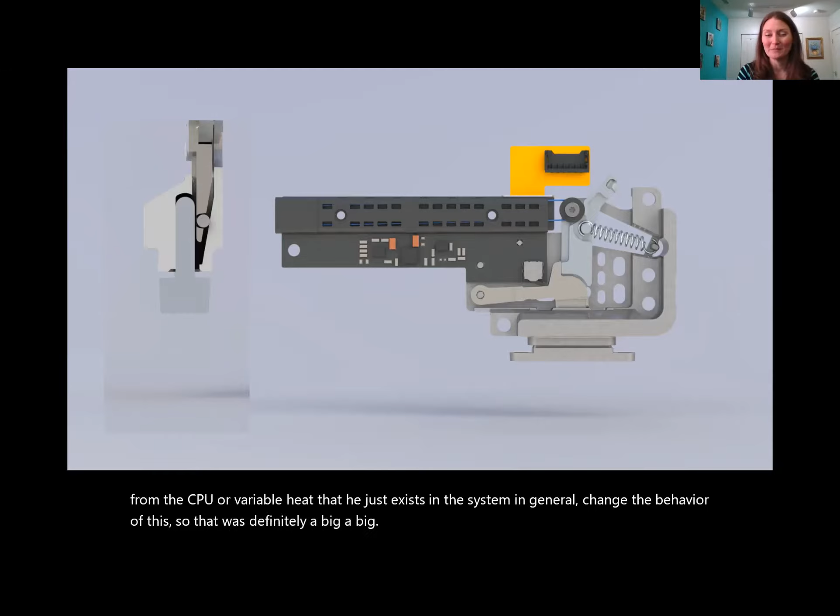The next question in the Q&A is a personal question. They're asking, I would love to hear about your experience as being an engineer in R&D and having kids. They're asking this as they're holding a 16-month-old in their hands. Oh, I'm baby crazy right now, so I'm jealous.

It's challenging. Everything in life is challenging. Having kids, probably in any form of job, is challenging. But I think the most important thing that's gotten me through, and I've gotten better with each kid, I'm more optimistic and positive about how this experience is going to go than the last two even, is having a team that really supports me. Our team is a family.

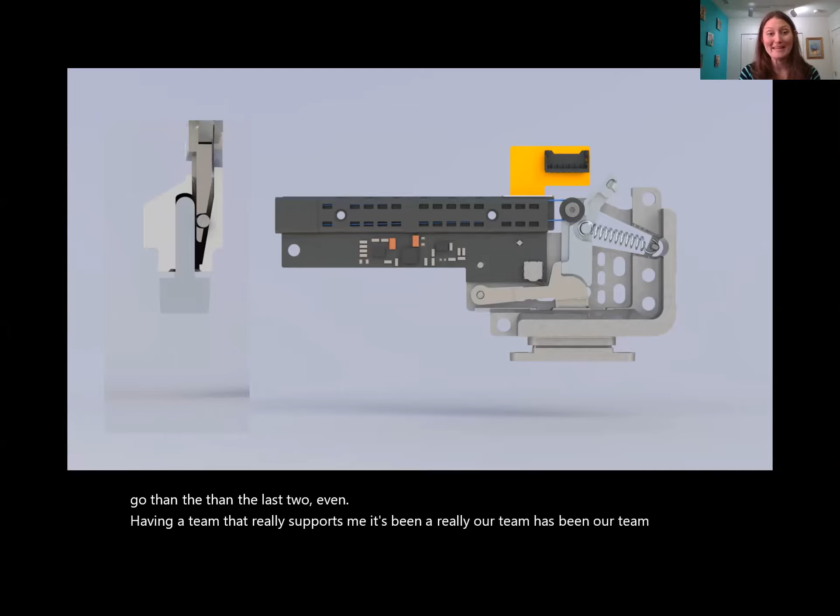Many of the people on our team have been with our team for the last 10 years since we started. And I've actually had the same manager for just about 10 years, which has been pretty incredible to go through this journey with the same people, the same environment, and really that support. And so when I went on parental leave the first time, it was right as we were shipping this. I went on maternity leave in September, and this was available to the world in October, which is a pretty intense timeline of fixing problems and getting it out there as quickly as possible.

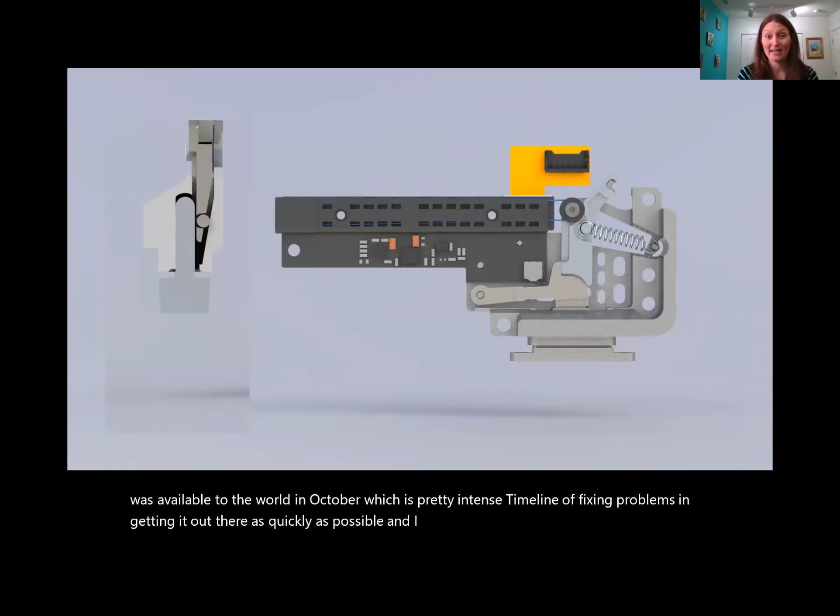And I was stressed out, and I thought, maybe I'm going to kind of pseudo work and have a baby. Maybe I'm going to figure this out. And when I had that baby, work went away. There was not even an option at that point. And if you have a 16-month-old, you can probably relate to that. There was no balance that was going to happen. I was going to take those 12 weeks that I had off, and they were going to be 100% dedicated to my baby. And I thought, if work fails, work fails.

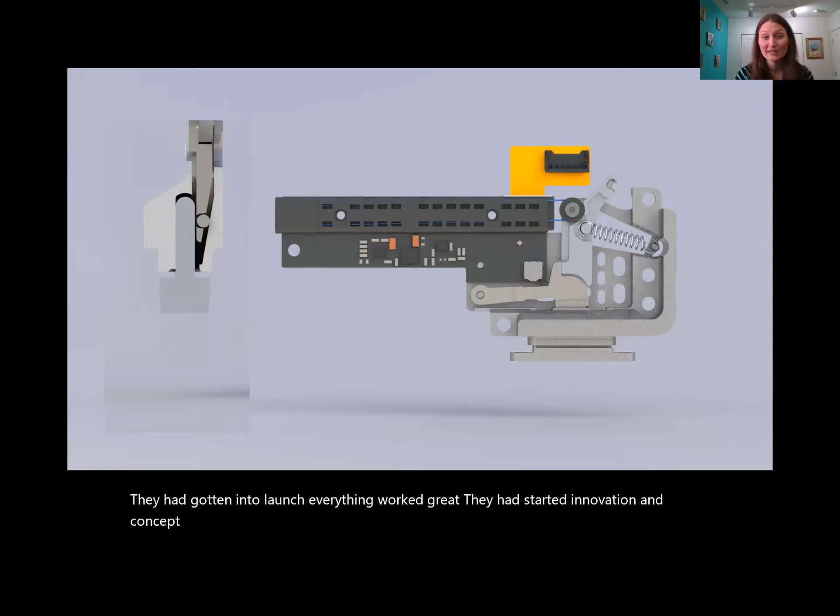And I came back and everything was fine. Everybody had supported, they had gotten it into launch, everything worked great. They had started innovation and concept development on the next project. I jumped right in and had one-on-ones: where has your headspace been on this? Get me up to speed. I was excited to go back. Not everybody is, but I personally am not cut out to be a stay-at-home mom. I'm aware of that. That is a far harder job than what I do.

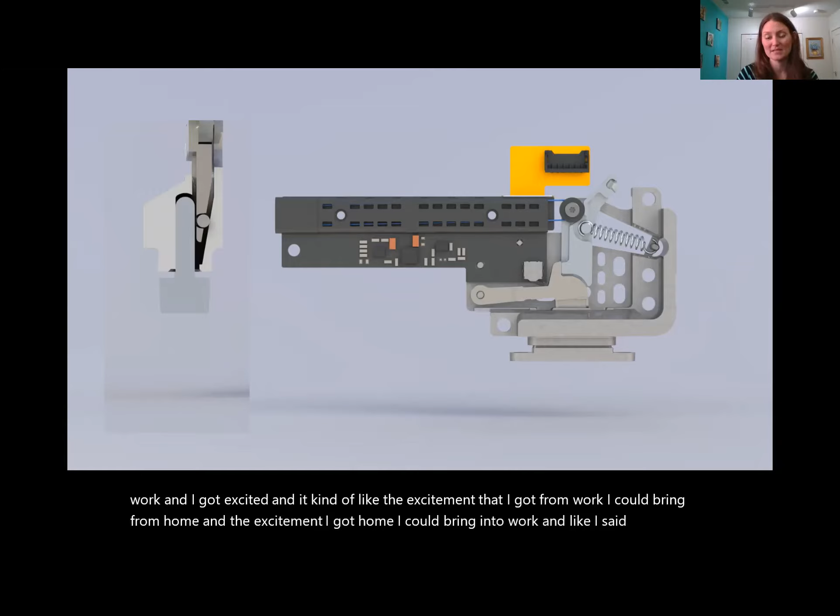And so I went back to work, and I got excited, and the excitement that I got from work, I could bring home, and the excitement I got at home, I could bring into work. And like I said at the beginning, it's had its tough times, it's had its challenges, and I've had to make hard decisions. But I think my manager and everyone on my team knows my family comes first. And if it comes down to anything where there's a choice, it's a very clear choice for me. And I have a team of people that support that choice, and I support them in that choice too. And so it's worked out really well for me.

Wonderful. We got another question here. This is a question from a proud Surface Book 2 user. Yay. The questions were about how many design iterations do you typically go through for one product? And any suggestions on reducing that number? And then there's another question about any plan to update the Surface Book design in the near future? I can answer some of those questions.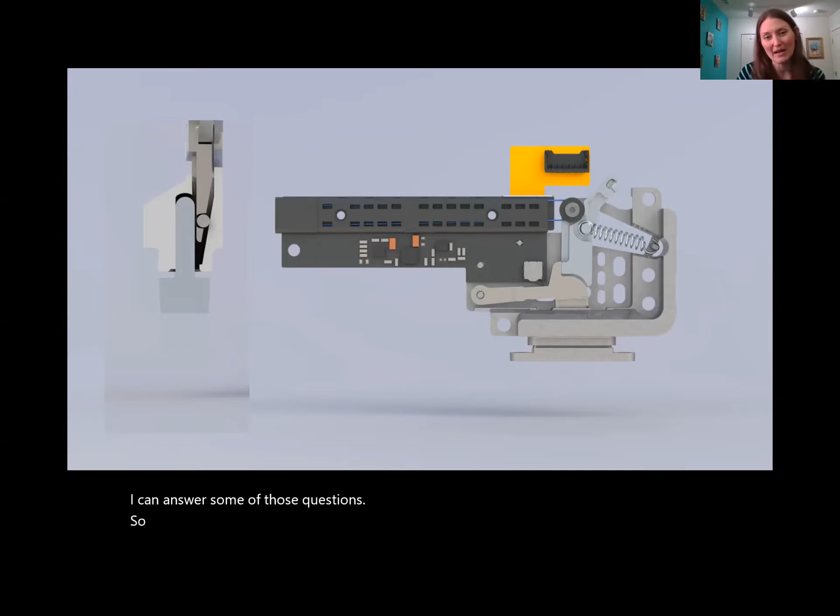So for a typical product, I mentioned earlier that at the system level, building a whole functional computer, we have very specific and very expensive engineering builds for those. Depending on the complexity of the program, if we're just taking a computer and updating the processor, it might take one build, maybe two builds. If we are changing some things about it but generally keeping the form factor, it might be 2 or 3 builds. If we're doing something from scratch, like Surface Book, with this whole new concept, it's more like 3 or 4 builds.

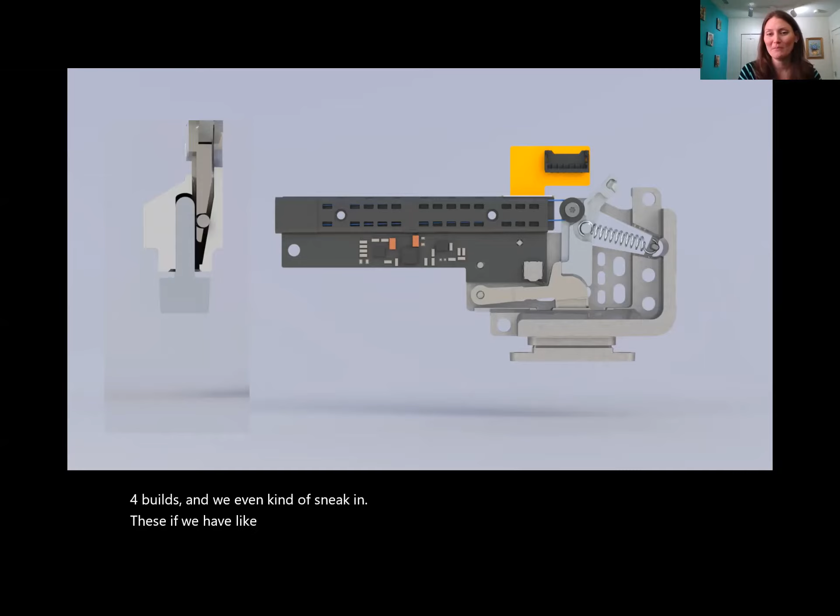And we even sneak in, if we have EV engineering verification builds, an EV3B or an EV3.5 or something like that along the way. So it varies depending on the complexity. But in between these builds, especially in COVID, we're having a lot of mini local builds here. We make prototypes, and sometimes we'll say, this prototype is not going to be functional. It's not going to have batteries, but it is going to have the detach module. It is going to have the connector, and it is going to have the fan, because maybe we want to see if the fan's going to get pinched or something.

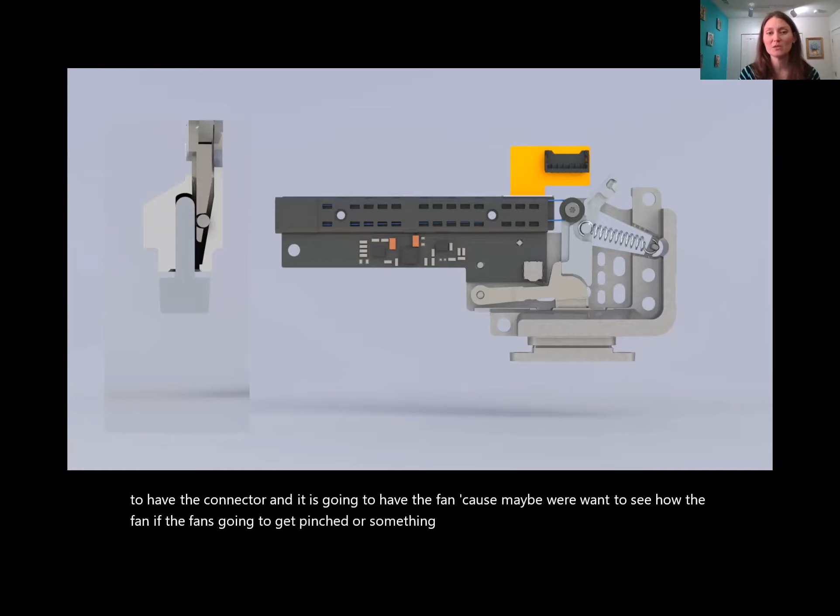So we try to be really smart about how we have these interim builds in between so that we can keep learning continuously and not be waiting for these big system level builds to happen. So it's kind of a constant thing.

Great. The next questions. Was there another question in that? There was also, I think, the next Surface, but I think that might be too revealing. So you can skip that one, I imagine. Yeah, I appreciate the question. I cannot answer that. Yes, for stock purposes.

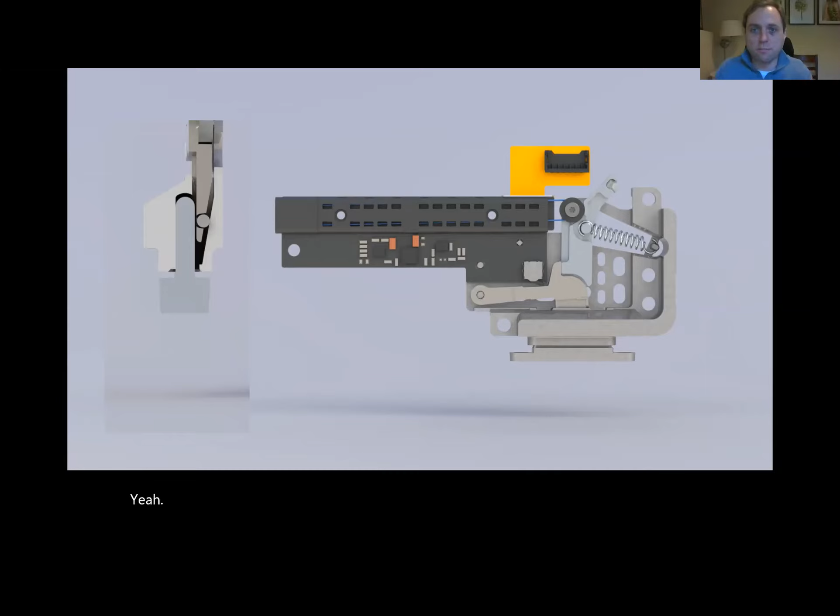So the other question here is, can you please elaborate a little bit on what different teams, DFX, dev, and manufacturing, work on the mechanical engineering aspects of Microsoft devices and how they collaborate with each other? How do you make sure that all the aspects of a product are precisely designed by all these teams? So kind of bringing everybody together. Yeah, that's maybe the hardest part of my current job. It's evolved as I've gone from owning screws and magnets, which are super critical parts of the design but stay pretty much in the mechanical world, to now being responsible for a product where I have to think about every internal customer, from sourcing and what it's going to cost.

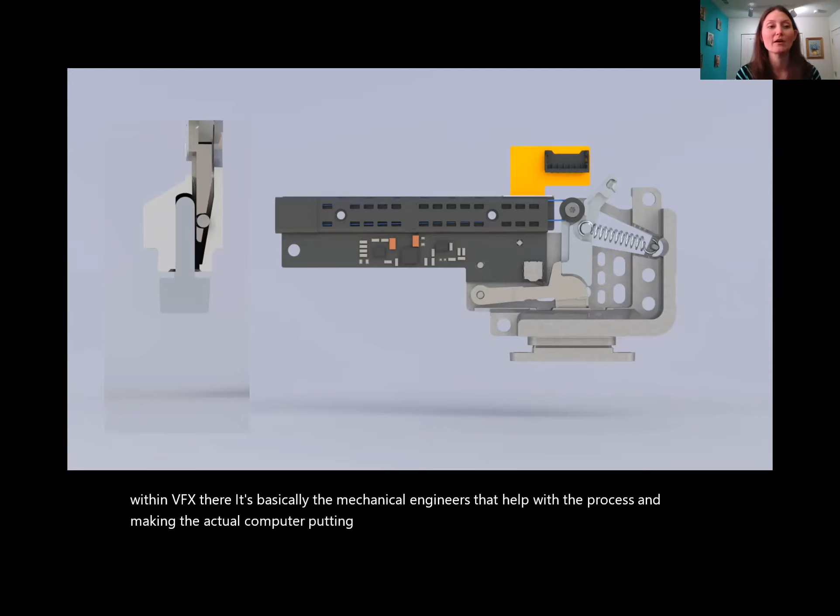DFX, the acronym is design for, and I think it's experience, but there are a lot of different functions within DFX. It's basically the mechanical engineers that help with the process of making the actual computer, integrating and putting the computer together. Manufacturing of enclosures specifically is one of our biggest areas of manufacturing, where we have the biggest teams. We're either CNCing or stamping or die casting these huge enclosures that have a lot of constraints and a lot of requirements.

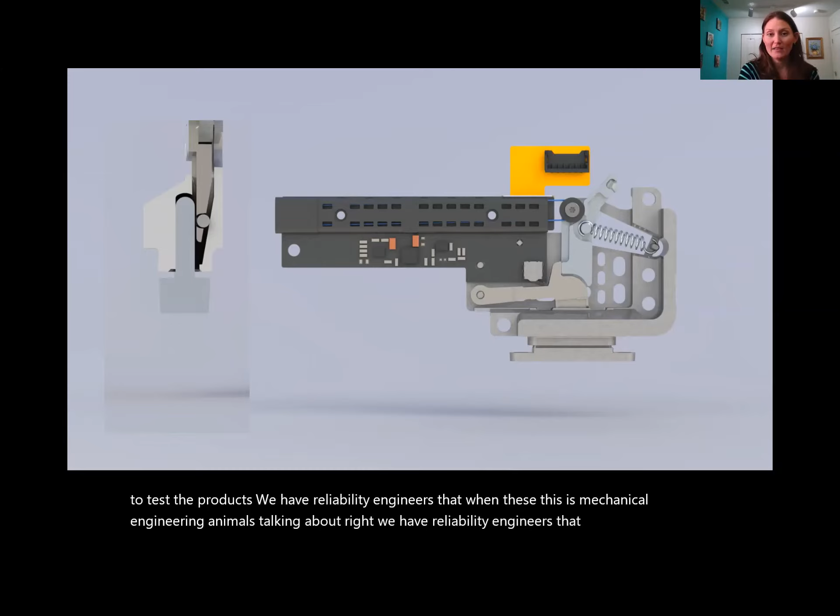And so we have to test the products on the line. So we have manufacturing test engineers that design the enclosures to test the products. We have reliability engineers, this is all mechanical engineering I'm talking about, right? We have reliability engineers that test and verify the quality of the product over time and help us understand all the different scenarios, what we can predict, what we can expect to happen.

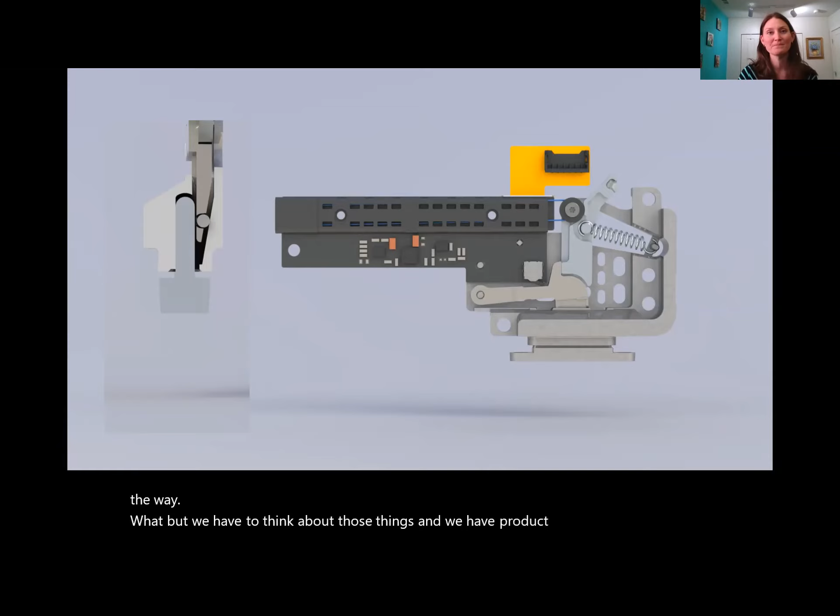And if you lived in Siberia and you left your computer in your car overnight, is your vapor chamber thermal cooling solution going to freeze and expand and pop open and hit your battery and cause a fire? No is the answer, by the way. It won't, but we have to think about those things. And we have product safety engineers. We have mechanical engineers that span this vast spectrum of different roles that have to feed into the product to help us make it right.

When I talk to interns or when I'm at colleges doing recruiting activities, the assumption is, mechanical engineers design a part. It's like, no, mechanical engineers do so much more than design a part. And it's kind of incredible. I could talk about it for another 20 minutes. I probably shouldn't, but it's a huge area that has a lot of different moving parts, and we have to spend a lot of time and energy making sure that all the contributions are heard, accounted for, and paid attention to.

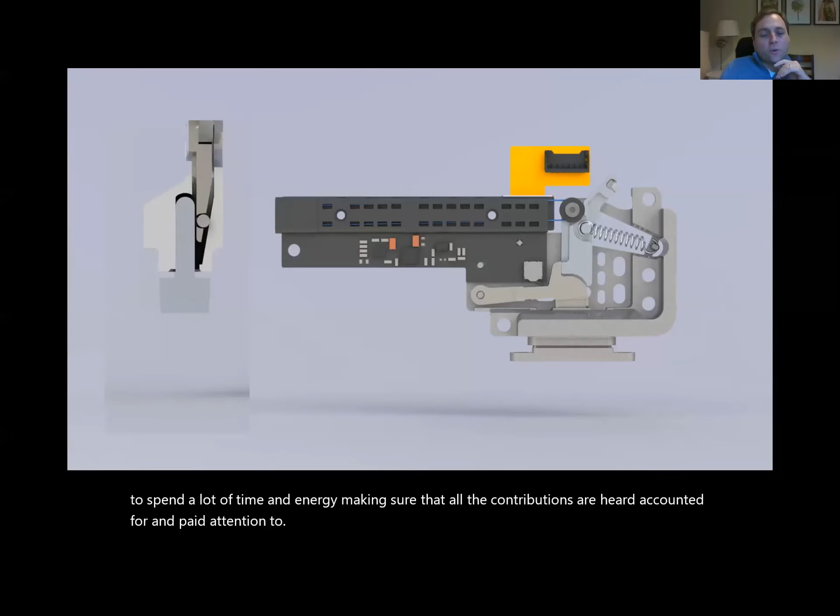Great. I think this next question might fit in nicely, which is, what do you wish you had been taught, or maybe what other mechanical engineers had been taught in undergraduate, but were not? What's currently missing from new hires that you get to date? And I'm not talking about UW Huskies, because they come out completely ready. Perfect. They're perfect products.

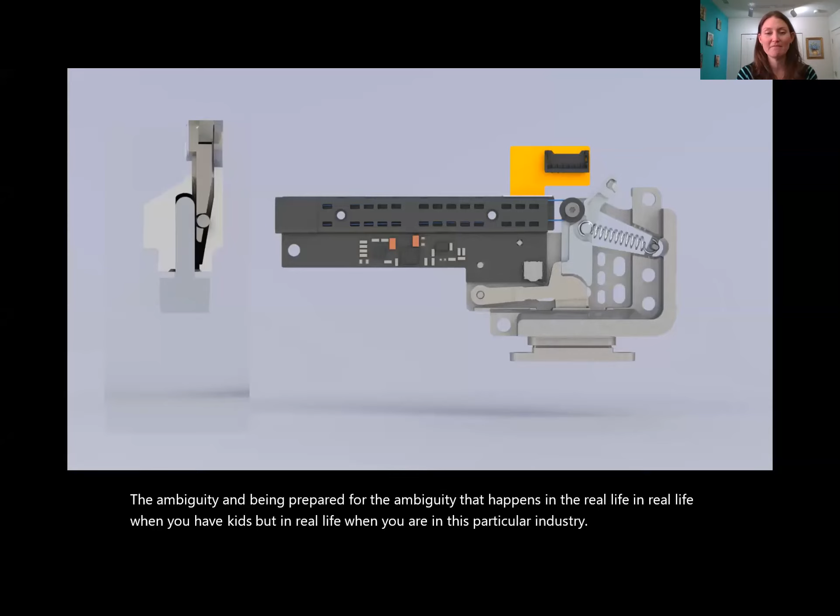Yeah. It's a good question, and some of us have talked about this a little bit before. The ambiguity and being prepared for the ambiguity that happens in real life. In real life when you have kids, but in real life when you are in this particular industry, it's kind of in the same vein as if you would have asked them, they wanted faster horses. We don't know what we want. We want to try something that's never happened, and then we might find that it doesn't actually work at all.

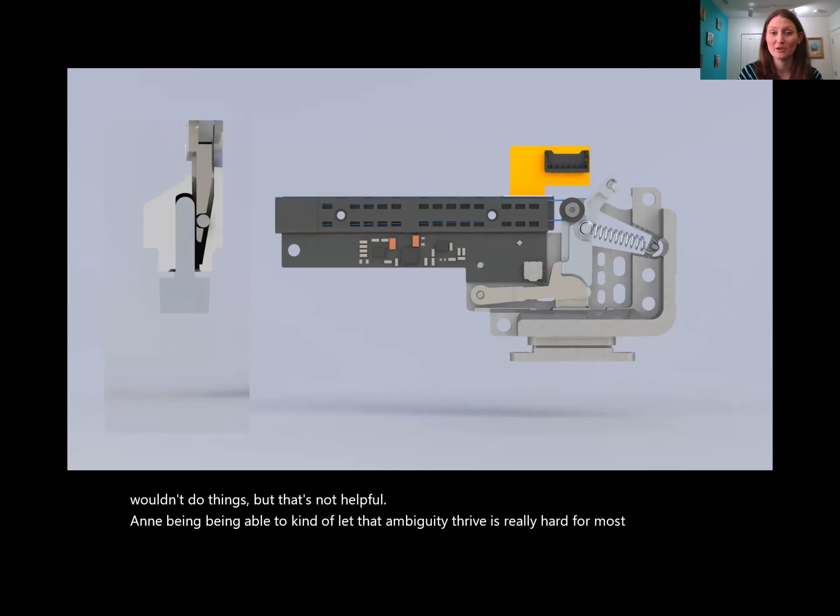We need to be open to really exploring all possibilities and not shutting something down because it seems like, with some of the examples, if you say nitinol, you're not going to be able to control the temperature. There are some things where you can easily shoot any design down. You can say why you wouldn't do things, but that's not helpful. And being able to let that ambiguity thrive is really hard for most people, especially early-in-career people, because you don't have that much ambiguity in school usually.

And then the other thing that comes into play with that is change. Things are changing in the technology industry like you wouldn't believe. We'll just use the generic example of USB-A. You want USB-A, and that's what you design in, and USB-A is a certain size, and it has a certain electrical connection and cabling, and everything is designed for USB-A. And then all of a sudden you realize everything's changing. By the time we release this product, USB-C is going to be what people care about. We have to change. That's hard.

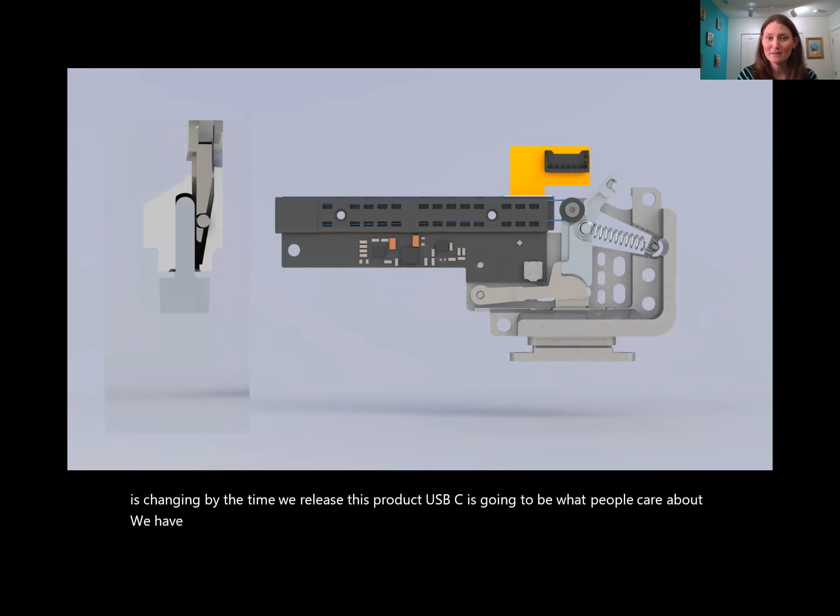It might seem like a simple, okay, just swap out the connector. It's way more complicated than that. It impacts your motherboard, it impacts your enclosures, it impacts the cabling, it impacts all the components around it. Maybe the thing you're having to change is a hotter component, or something that is dynamic and can make it even harder, and you have to have more reliability testing.

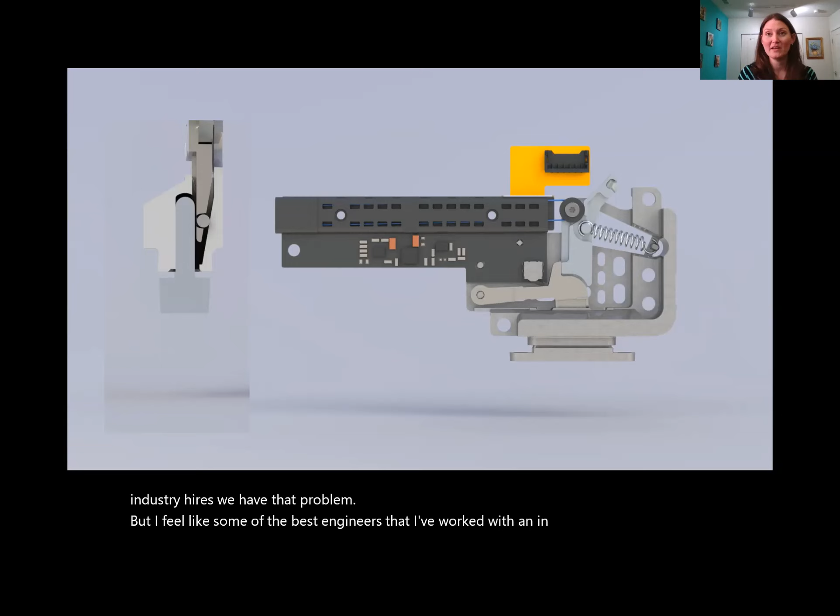So being able to live and be comfortable in ambiguity and just trying new things and being open to that, and then being able to change at a pretty rapid pace, those are things that are hard to find in anyone, not just college hires. A lot of industry hires, we have that problem. But I feel like some of the best engineers that I've worked with in Surface over time have really done a good job of grasping those two things.